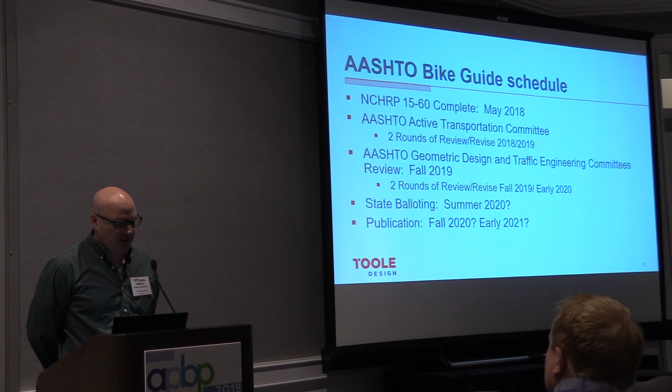So, big disclaimer, this is subject to change. I just mentioned we're in year 4 of this. And it's because there's a lot of players that need to say this is a good idea. So we finished the NCHRP part of this in May 2018. And we went through multiple rounds of revision. I believe we were 3 drafts to get to the final in May of 2018 by our NCHRP panel members.

And then we are now working with the Active Transportation Committee. We have gone through 2 rounds of comment response with them and changes. I'm waiting for last little comments from them to come in the next week or 2. And then we're going to make some final revisions. I've been told they're relatively minor. And then we kick it off to the real crew, the geometric design, which is really the highway designers, and the traffic engineers, which are really the state DOT traffic engineers.

And as you can imagine, their perspective tends to be at a different scale than what we're operating in. So they're going to get opportunities to review and comment, filtering their comments through the Active Transportation Committee. And then we need to address their comments. And they're going to be our harshest critics in this process. And we need to build their support because ultimately they are the voting members that decide whether this guide gets adopted.

And so I can't promise how long this will take. Our hope is that we can do this in an expeditious manner over the next 6 to 12 months, and then hopefully by next summer we can have a guide that's ready to go to AASHTO, the organization, which is really just a nonprofit like NACTO, where they will publish the guide and format it. So this is very tentative, and honestly these dates every time we present on this have been moving further out because there's just so many people involved in this.

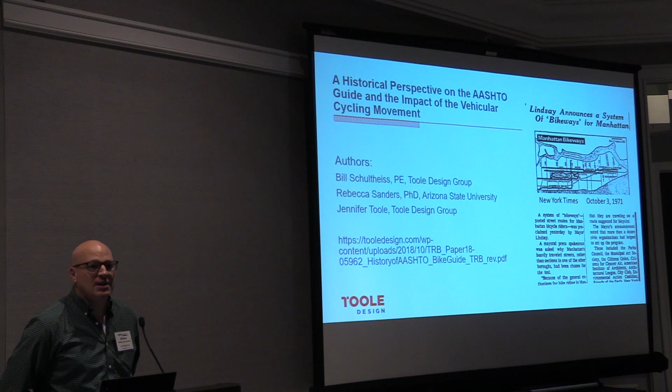And I was doing so much of that when we got into the update of the guide. I knew there were points of controversy because I got to work on the last guide in 2012, which we wrote in 2009. So you think back to 2008 and 2009 and the types of things we were doing in this country for cutting-edge bikeway design. Separated bike lanes were not on the agenda. We actually had a whole chapter on emerging treatments: protected bike lanes and bike boxes and 2-stage turn boxes and bike signals, and it was deleted because there was fear that we weren't ready and there wasn't enough built, and it was just too speculative on whether these were good ideas. And as you can imagine, since 2009, when that decision was made, we've built a lot of that stuff.

So looking back at the history, it's interesting: in the late 60s, early 70s, there was a big movement to address air quality. EPA was invented. There were bike protests. They're interesting to read about. The first Earth Day was an interesting one. People literally wore gas masks on their bikes because the air quality was so bad. There was a push to do a lot more improvements for bicycling, and some of them were interesting because they were pushes for making the street safer for cycling.

And I love this one, because if you're online or whatever, you kind of keep up with what other cities are doing. Well, the city of San Francisco has been trying to improve Market Street since 1972 for cyclists. They're still talking about it. They're still making changes, and there's a lot of controversy. What do you do to change it? But this has been an ongoing discussion now for 50 years, which is, I think, stunning. But they've never given up, and they're working on it.

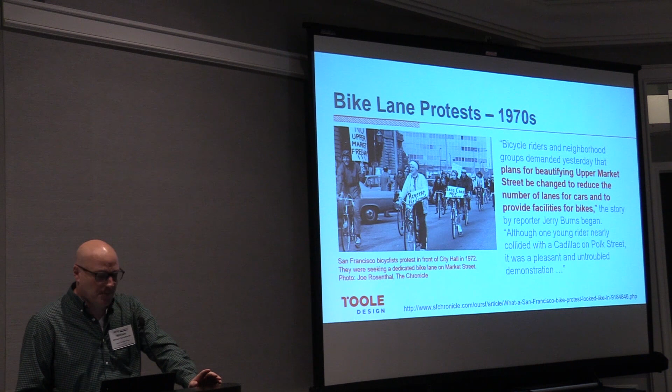In the early 70s, there was a bike boom. Carlton Reid wrote a book on it. It's fascinating, called Bike Boom. But if you look at old plans that were written in the early 70s, very ambitious. There were a lot of hopes and dreams in the cities around the U.S. that they'd become bicycle-friendly communities. And there was even some research funded by the federal government. USDOT funded the initial 70s research.

And a lot of the work was actually in Davis, California, because they were the first city in America to build bike lanes, and I was really impressed with the quality of the engineering minds in the early 70s on this. Really detailed thinking, really good analysis, and they found a lot of things that we know to be true. Bike lanes are generally safer, contraflow cycling is higher risk. Cyclists aren't really moving all that fast, and motorists, of course, will park in bike lanes if you give them a chance. So this is no mystery. We've known this for 50 years. But these things became controversial statements, interestingly enough, as I'll talk about.

So that quality research led to the first AASHTO Bike Guide in 1974. And as I talked to people around then, they didn't even know this existed. I talked to a gentleman who worked for Federal Highway in 1981. He didn't know about this guide, didn't remember it. And I found that interesting, and why did this guide disappear?

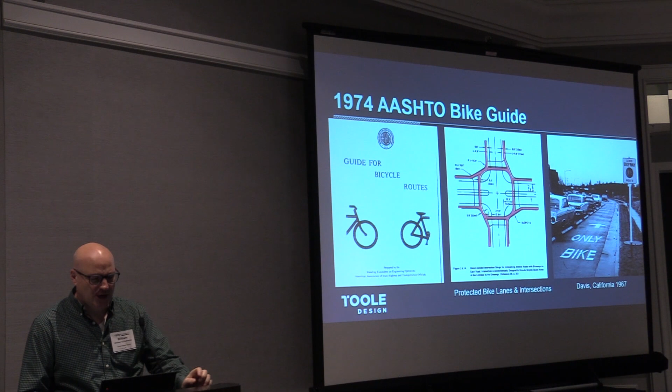But this guide had separated bike lanes in it, protected intersections, in large part because of the findings from the early California research. It recommended that bike lanes never be terminated at intersections. They continue all the way through. They should actually mark them through the intersections, like a bicycle crossing, a bike crosswalk. And they even do two-stage turn boxes. All three of those things became amazingly controversial in the 80s and 90s, even through the 2000s, and even to the present day, they're still not done in most communities.

So there were even warrants. Our profession loves warrants. Engineers love them: help me make decisions. And so they had very low volume thresholds for when a bike lane would be warranted. 2,000 vehicles a day was considered a busy street. Should have a bike lane. That's definitely every arterial roadway in America.

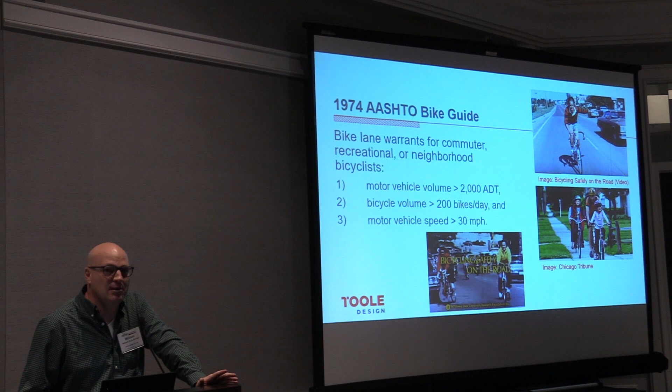There were some amazing instructional videos, and I'm going to show you a few pictures. You can find this on YouTube, and it is worth watching because you see actual video of the real conditions, the built environment. Bicycling Safely on the Road, from 1974, I believe. You can Google that on YouTube. So these pictures on the bottom are screenshots I stole from that video. And they're videotapes of Davis in the early 70s.

The initial AASHTO guide recommended that we think about bike trails and bike lanes as actually having lanes, like we do for cars. Like, what's one lane? One lane's at least 3.5 feet wide, desirably 4. Well, do I want a 4-lane facility? It should be progressively wider. And that concept of lanes is really important when you think about our shared use path system. And we know that there are challenges that result from not having lanes.

But the challenge in the 1970s is understanding the context of the 70s. We didn't have ADA. There were very few curb ramps. So when you start saying it's okay for bikes to ride on paths, and the path's a designated sidewalk, because cycling on sidewalks is largely illegal, then you had to put up bike route signs to make it legal to ride on the sidewalk, because that's where people felt safer. It started creating this idea of sidewalk routes and paths, and that bicyclists were losing their rights to the road. And can you imagine, again, screenshots from that video, how fun is it to ride on a sidewalk with no curb ramp?

You get to be a pretty good, skilled cyclist jumping curbs, but you don't want to be told you have to ride there. You don't want any perception that you have to ride there. Well, that caused controversy. There was an amazing conference I was able to dig up and actually get the proceedings from. And back then, no internet. You had to get the printed document where everything said had to be written down and put into the documents so people would know what was talked about.

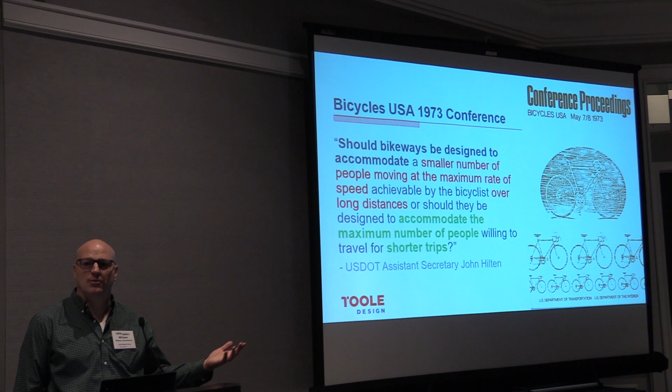But the thing that struck me as really prescient in 1973 was this fundamental question. What are we doing? What's the target design user? What's the target design trip? Are we trying to move a small amount of cyclists as fast as they can possibly go, which is really kind of the racing end of the spectrum? Are we trying to maximize the use of cycling for the reasonable short trips that people take, and try to create a system that is appealing to the most number of people?

This was a question that was being argued in the early 1970s as a fundamental question for the profession. And it was answered loudly that, in fact, we wouldn't try to create a system for the mass of people and what they wanted. We would create a system for a small number of people who were the real cyclists, who were already out there and who were comfortable, not afraid of traffic.

And you look at the advertisements from the 70s: if you're serious about cycling, your bike shouldn't be a toy. And there's this whole concept that cycling on the sidewalks or protected bike lanes means you're not a serious cyclist. That's really child's play. That real cyclists ride the road, real cyclists put on the lycra costume, and real cyclists get racing bikes sold by Raleigh. And actually, you look at what the bike manufacturers made back then, and it was mostly racing bikes. And so we created a whole culture around that.

And unfortunately, John Forester became powerful in this perspective because he really understood the levers of power, how things worked. So he joined the California Association of Bicycling Organizations, became its president, joined the League of American Wheelmen, got on the board, and then he got involved with influencing design guidance in the state of California.

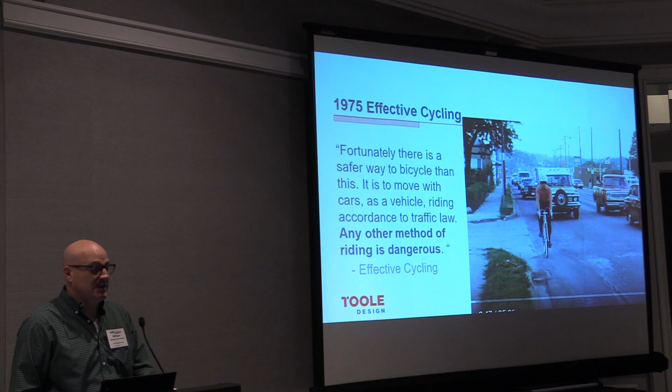So he invented his Effective Cycling program, and actually that video you watched is his. That video I encourage you to look up is 25 minutes of his philosophy of how this would be a better way to approach cycling, and that this was really the vision. We just need to overcome the human tendency of fear and anxiety, put those emotions aside, and just toughen up and get out in the street. The only thing stopping you from cycling was your own mind. We know today that's not true.

The problem we had in the 70s is, without widespread access to information, whoever wrote things down had power. He published books, went to conferences, he lobbied agencies. I've literally seen this book on the shelf of state DOT engineering libraries. It had an impact. And you can see it here. A serious cycling facility should be designed for 30 miles an hour. Well, that's a very small percent of the population that wants to go that fast and is willing to do it. And then if you're trying to do something less, you're not really trying to get that serious cyclist.

And this one just strikes me: that a facility designed only for childlike and incompetent cyclists is very insulting to people, encourages the toy bicycle attitude and discourages cycling for transportation. These are not made up quotes. This is really the mindset that pervaded this. And then you look at the contrast in this photo from the Netherlands and you think about, why did people listen to this man?

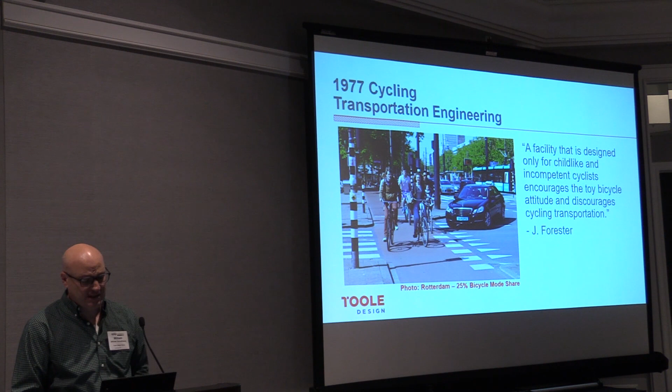Why was this not seen for the ridiculousness that it was? And the reality is, he was really smart again about levers of power. Bicycling Magazine was interesting to read in the 70s. It was always this give and take. If someone wrote an opinion piece, and John Forester was good at this, if someone wrote a research study, he demanded a rebuttal. There's so many research reports from the 70s where he was given permission to write a rebuttal to that research statement. That is unheard of, really, I think.

And his rebuttals were not based on science or evidence. They were based on his opinion. So he was given an enormously outsized ability to influence design guidance in this country. There's this gentleman, Bob Sommer, who was a really big advocate in Davis, a professor at Davis, actually. He said, hey, let's stop this war. We're all trying to create a system where people are willing and happy to promote cycling. You're trying to promote cycling. We're trying to promote cycling with separated infrastructure, bike lanes. Why are we fighting with each other?

He said, why don't we join up and we'll create networks. We'll advocate for networks of bike lanes and paths for people that don't want to be in traffic. And we'll also advocate for you to maintain your right to the road. So we don't create mandatory use laws. We'll oppose them. Let's join up together. And it was flatly rejected as a slippery slope, that if we give in an inch, we're going to lose it all. And so he took with his colleagues, and this guy was important, John Finley Scott, because he became the head of CABO after John stepped down.

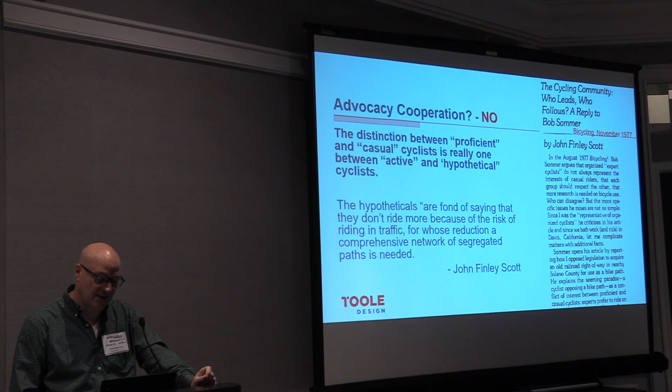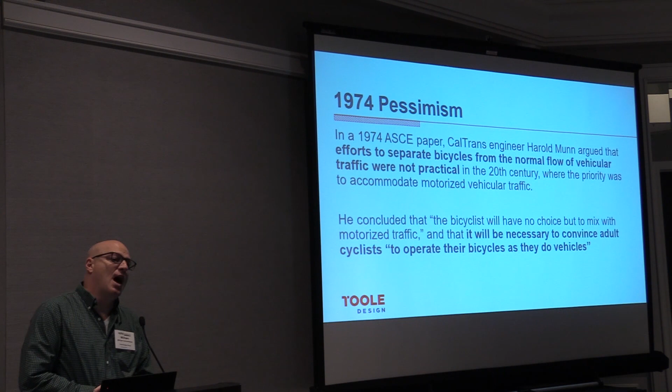And I think what's challenging is that in the 1970s, white male-dominated advocacy in this space didn't care. It was about their perspective. I'm comfortable with it. I don't care about your perspective. And I'm going to drive this. And it's unfortunate because this 74 ASCE paper was really tragic. Harold Munn was working for Caltrans, helping write design guidance. And he said basically, culturally it was going to be impossible to create a system where we had biking as normal in the United States.

That ship had sailed. We're a car culture. We're always going to be a car culture. And people just need to get used to riding the road. And why do I say these things matter, this advocacy?

The first bike guide ever written is the 1978 Caltrans Bike Guide. Look at two sources in it. These are sourced in the bibliography. Harold Munn's pessimistic article saying, this is never going to happen, get used to riding the road, and John Forester's nonsense that was not based on science, but was called a design guide, were sourced in the first 1978 Caltrans Bike Guide as valid sources to make decisions about design guidance.

And what that led to was, again, a strong push of advocacy that all the things that we now know are important for safety were removed from the next version of the guide. In 1981, protected bike lanes were removed, protected intersections were removed, two-stage turn boxes were removed. It was actually stated as a better practice to terminate bike lanes before intersections. You shouldn't mark bike lanes through intersections because bicyclists didn't have the lane positioning. They were removed not based on science, but based on advocacy, strenuous advocacy.

And I talked to Mr. Lemieux, and he was the guy that worked for Federal Highway, who was one of the prime authors of the '81 guide, and who did not remember the 1978 guide, didn't know about it. And he said John Forester provided over half the comments in the '81 guide. And I've talked about how long we've been working on this update to the current guide. He dominated the space back then.

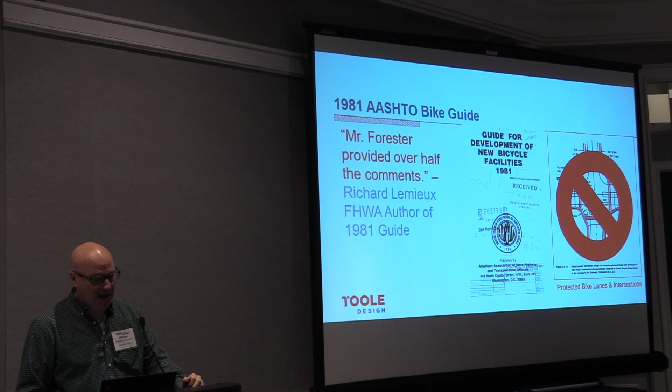And so it's interesting that in the next '81 AASHTO Bike Guide, this is a quote from the introduction: Really, the only way we're going to improve cycling and motorists is through behavior, enforcement, and education campaigns. That's the way we're going to make a safer outcome. And we know that education and enforcement are not enough, that they really have a very minimal impact on changing built environment outcomes. And then it led into changes of federal policy, really de-emphasizing it, kind of stopped funding it, stopped funding research.

And then the idea was, well, the wide outside lane became the thing. This was the magic treatment that was going to make it great for everybody. And it's still in state DOT design standards to this present day. The state of Texas wrestles with this. And they have a design directive that every road they build has to have a 16-foot wide outside lane to accommodate cyclists. And it doesn't matter if that road is 55 miles an hour or 25 miles an hour. That is the default standard for cyclists.

And it led to this problem culturally, the 1% problem, I call it. I go to any public meeting and the average person says, why are we doing this for such a small minority of the population? And when they say that, they're talking about cyclists, racing groups, typically, the Spandex Road Warrior. Why are we making these changes for them, for this small niche group? And so what I like to say is that we need to understand this history because it created a culture that we're living with the ramifications of to the present day that affect not only the design profession, but the public's perception of what cycling is, because we built out this environment.

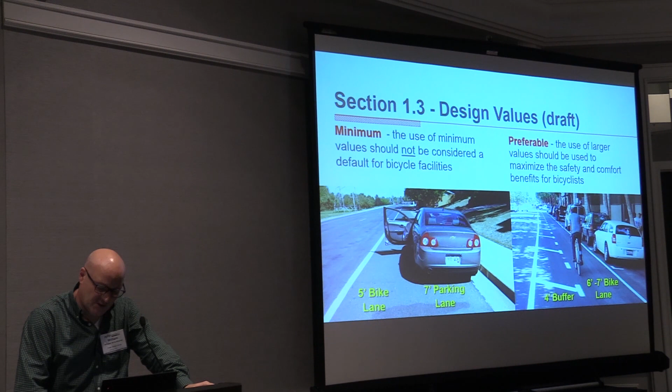The biggest thing that we've wrestled with as a profession is we design to the minimums. The presumption has been that if you do the minimum, it's safe. What does safe mean? We've been challenging that notion of what safe means in this guide head on. When it comes to safety of a vulnerable user who's not in a metal box, that safety has to include comfort in your perception of whether you're safe, if it's going to be real. And so we're being very explicit in saying use of minimum values should not be considered a default, because this frankly has been an industry problem. We're saying that you really want to focus on the preferable end of the spectrum. You need to justify why you're not doing that, if you're going to deviate from it.

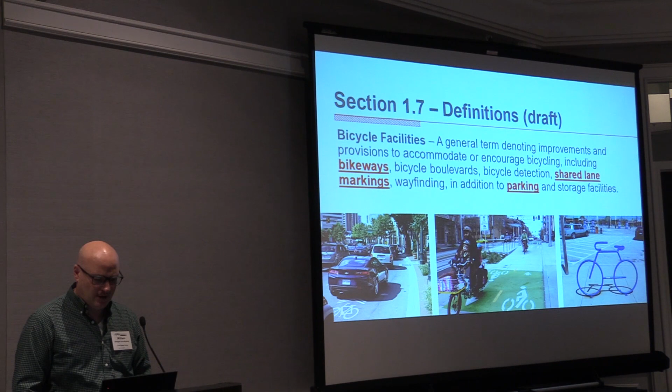We've had a problem in prior editions of the guide, and actually in the MUTCD, with how we talk about this. What do these things mean? We've had a meaningless term, bicycle facilities, that's been tossed out there for a long time. When you look at the definition, it includes everything from bike lanes to parking garages. Well, that's true, they're all facilities. But it's really too broad of a term, and it creates confusion. So we've created a new term, bikeway, which has been used, I think, informally. We tried to define it. We're open to suggestions for improvement.

What we wanted to really emphasize is that a bikeway is not a shared road. A bikeway physically separates you from traffic, or it's an intentional design to force traffic calming, which is what a bicycle boulevard does. It really prioritizes your movement. So you're either creating designated space with a separate lane, or you're traffic calming a local street that's really saying it's bike priority. That's the intent here, because people are calling shared roads bikeways, and it's a different ballgame, and we're trying to make that distinction.

And separated bike lane is the other one. This is an emotional one. A lot of the industry likes to call them protected bike lanes, and I'll tell you straight up, it's never going to happen in an AASHTO document because the word protected is scary.

And so, going more with the obvious, separated, I think it's perceived to be a non-biased term about what it is; it just describes what it is. But it needs to be physically separated by vertical elements, and what's interesting is if you use a horizontal buffer, and we've added that in the recent iterations of this, because ideally a separated bike lane has a buffer.

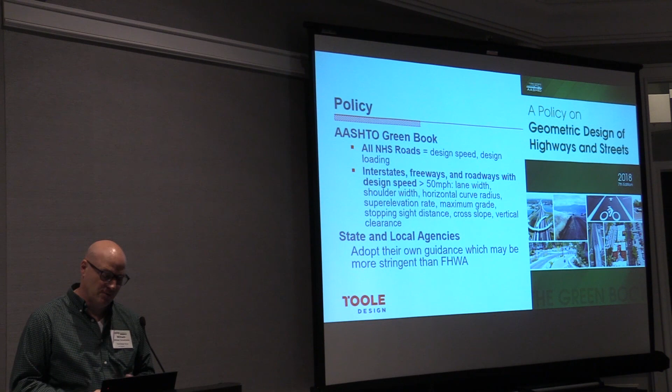Should we have 2 Green Books, one for cities and one for highways? Or should we do away with the bike guide and have one master street design book and combine it all so we can understand the trade-off choices we're making? So that conversation's happening within AASHTO, and I think that's wonderful. They've always supported flexibility. We continue to do that.

But like I mentioned, the most powerful aspect of the new Green Book is context sensitiveness. And when we're in the urban environments we're talking about, that's crucial. In the history of safety research, a lot of it wasn't based on an urban context, really rural, suburban, highway context. And that research was misapplied in urban areas, with devastating consequences for safety, ironically, in urban communities. This book was really important for showing ways in which we're misinterpreting existing design guidance. So this, again, was a primary source for our guide, as is the MUTCD.

Now, the challenge with the MUTCD is, like AASHTO, it's on a slower update timeline. We were in a situation where the MUTCD that was published in 2009 was last written really in like 2007. And so now we're dealing with an amazingly outdated document when it comes to bicycling. So we made a deliberate choice in the AASHTO guide to work with the MUTCD, but we have to move on. We can't wait for you.

And so we've included a whole bunch of treatments that are not in the current MUTCD, but are likely to be in the next edition, because they've all been approved by the National Committee, and I think are likely to end up in the new MUTCD.

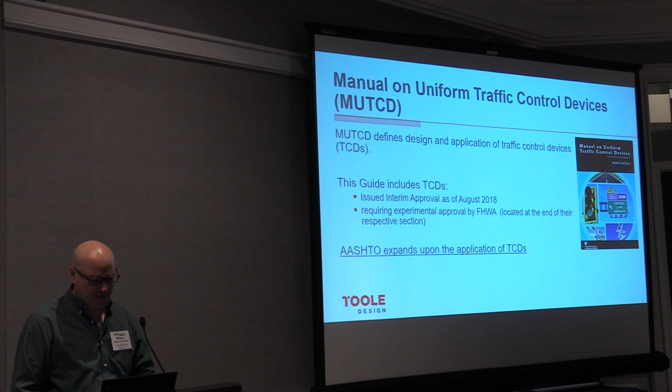Yeah, and the thing about the guide to keep in mind is it's a guide, it's not a standard. I feel like engineers get really hung up on that term, and the way I think of it is a standard is something that a structural engineer needs to use. If you don't design to the standard, the building falls down. Guidelines are just a guide, and that means that there's that inherent flexibility built into it, and we should really be leveraging that on all of our projects, applying the engineering judgment and the planning judgment that we're allowed to use to get the best benefit for each individual situation. And everything that we're doing really needs to be context sensitive.

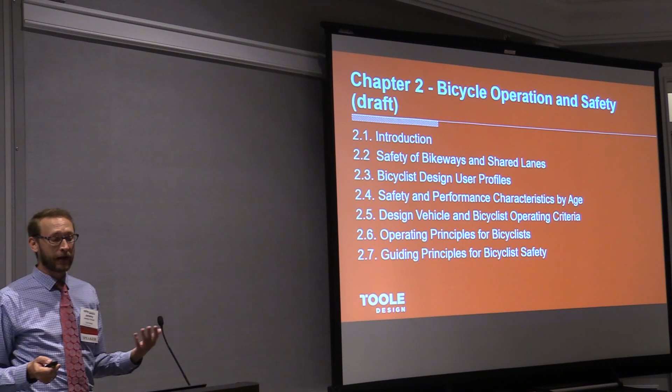Chapter 2 deals a lot with operations and safety and really the basics of these concepts. And as Bill mentioned, it is very dense in terms of research and studies that have been prepared. So if you follow the guidance that's in this guide and the homework that Jennifer Dill gave us this morning, we will already tell you what sources you can turn to to dive a little bit deeper into this content. Everything we've done here has been very heavily influenced by the research that has already been prepared. And a lot of this goes way back.

So as Bill mentioned, studies all the way back to the 70s really hit on these ideas that riding against traffic is more dangerous, that you have lower crash rates when you actually provide facilities. But we also still have all the anecdotal evidence that when you're riding on a shared use path, things like a bollard in the middle of the path, while maybe a good intention to keep vehicles out, present safety challenges. When you have insufficient width, and we've all experienced this on our most congested shared use paths on the weekend, it's a nice day, everybody wants to be out on it, but we designed it to the minimum of 10 feet, that's not going to be comfortable or safe for anybody. And really leveraging those experiences and that research to provide the types of facilities that we want.

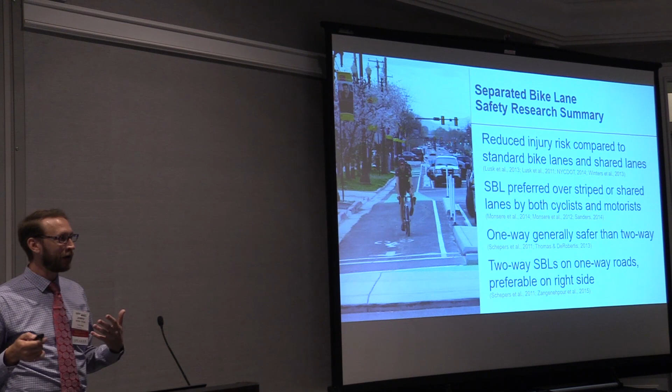And this is just another spattering of some of the other research. The one I want to focus on here is this idea of the standard bike lane versus the shared bike lane. While I follow the APBP community, I'm also an ITE member, and you get this on their online community a lot, where people say, well, a bike lane in the door zone is unsafe, so we shouldn't do it. Well, that's just garbage. The research shows us that when you provide a bike lane, it's going to be more safe than the shared lane environment. And we can point to multiple studies, but also multiple locations around the country where this has been the case.

So one example is 15th Street in Washington, D.C. It used to be a shared lane environment, and you had maybe 30 bikes a day that would ride on it. And yet they had 20 crashes per million cyclists in that scenario. Then they did a one-way separated bike lane, but then you couldn't get home because it was a one-directional facility and nothing to link you back up. You saw a little bit of increase in ridership. The safety also improved.

And then when they provided a two-way facility, which we know two-way facilities have inherent problems with operations at intersections, there are some safety challenges to it. But what we saw is that the crashes per capita went down, 7 crashes per million cyclists in that location. And you're also seeing that the ridership is going up.

And then we have other research that points to the idea of when you have a connected network and you have higher ridership, that in and of itself creates safety in numbers principle. So everything in this guide just turns back to the research to be able to point the people that are trying to implement this to the more information that they may need to justify their design.

And even with these numbers, you still have headlines like this, that the 15th Street bike lane is the most dangerous bike lane in DC, which is just not factual. It's not looking at all the statistics of that location. So we have high ridership, so we might have more crashes than what used to be there before. You only had 30 bicyclists there before. Now you have hundreds a day that are riding on it.

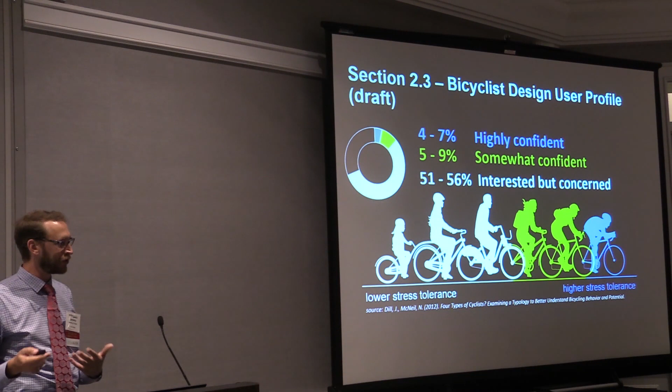But we also have to recognize that a lot of these interested but concerned bicyclists have very different performance characteristics. They typically are biking a little bit slower than our strong, fearless cyclists. And they might also have different characteristics in terms of the bikes that they're riding. You start to see lots more cargo bikes, bikes with trailers, pulling your kid, trying to get to daycare, you want to be able to go to the grocery store after work. And so the bikes themselves are also changing. And that's all baked into this guide as well.

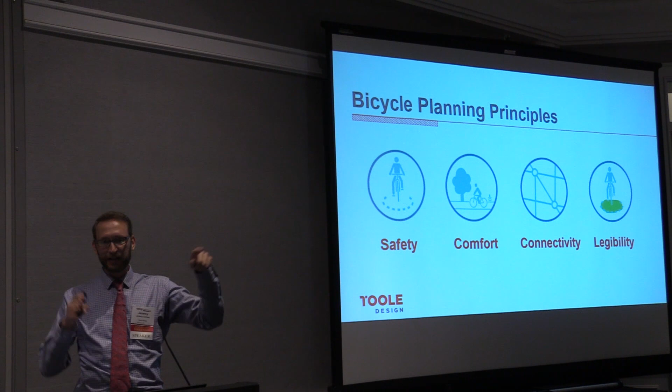For chapter 3, this gets into planning. So all the baseline efforts that we need to build out our bicycle networks. And it focuses on these 4 key principles: safety, comfort, connectivity, and this concept of legibility. That it should be intuitive to somebody trying to use the network how to navigate through it. They shouldn't have to look at a sign over here and then look at that signal over there. It should just be intuitive.

And also recognizing that we need to do a better job in community planning to create links where they don't exist. This idea that with cul-de-sacs, we've sort of broken up our street network and forced bicyclists that might live here to go all the way out to the street, even though they're just trying to get to the school. And this is something that in the transportation side, we don't always have control of. That's why we need to involve politicians, involve the decision makers that approve the planning effort of communities to be focusing on these issues.

We can include this as part of our bicycle master plans and find these opportunities to retrofit existing neighborhoods. But as new neighborhoods are built, these need to be fundamental ideas baked into the design of those communities. And that's very true in a suburban context, where oftentimes these are developed, built, and then we think about the transportation network after the fact. This needs to be part of that upfront planning.

This idea of legibility and connectivity, that when you have one bike lane, and I see this all the time, you build a bike lane, nobody uses it because it doesn't connect to anything, and then you hear from the public, well, nobody uses that, why are we doing more?

And it's because it doesn't get you anywhere. We need to have a network that actually gets people from their homes to the destinations that they're trying to get to. And that's not just getting them to work, it's creating links to the store, to the doctor, those short trips that are all around your house. And it's really easy to focus on this idea of, well, the commute mode share, that's what we need to focus on. No, it's all those little things around your house that you should be able to link to.

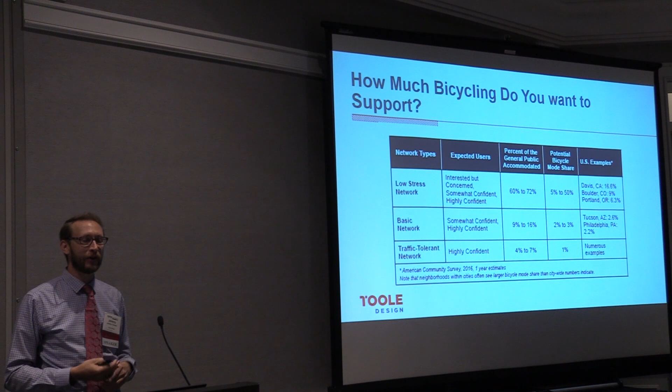And as we look at examples around the country, the places that have sort of focused on the basic network and high-stress tolerant networks really don't have a high bicycle mode share because it fundamentally doesn't accommodate those people. Interweaving these types of networks together is really going to get us a network that's going to work for the most amount of people, and that's that 72%. It's really accommodating everybody that chooses to bike.

So recognizing this as you're doing the effort of planning out your network, establishing what is going to be that low-stress network, and then overlaying that with the other types of networks, and making sure that people can get from A to B in a way that's going to accommodate their abilities.

And I sort of mentioned this before, this idea that we focus so much on the commute, but the number of trips that are commutes is really only around 30% of the trips that we take every day. All the other things are shopping, going to the grocery store, going to the movies, or whatever else we're doing. It's a much larger percent of the types of trips that people are taking. And we need to focus on that to create links between somebody's house and the trailhead.

I ask people, what type of cyclist are you? And I'll often hear, I ride on the weekends, I ride with my family on the trail. And when you ask those people, how do they get there? Well, I load my bike onto the car and we drive to the trailhead, and then we bike on the trail and it's nice, and then we load it back on and we drive home.

We need to be making those connections between people's houses and the trail, and also recognizing that the trails themselves will serve an important purpose for some slightly longer trips. Again, this idea of overlaying these different types of networks and understanding what their use is to get the biggest bang for our buck.

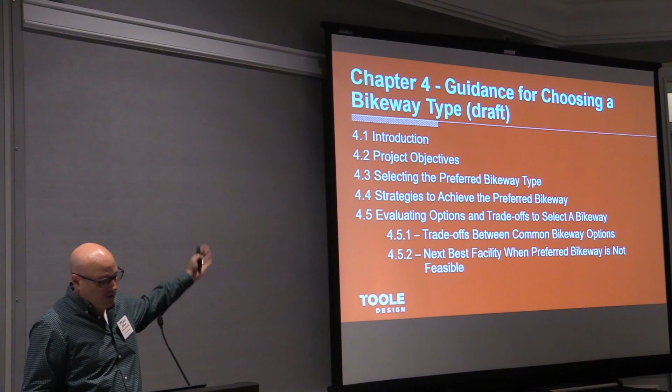And so we're trying to be more direct and say that if you really want to improve cycling safety and actually increase use, there's a land use component to this. But you as the transportation agency have to make some different design choices, and we're going to tell you how to do that. So we've got a chapter on bikeway selection, which largely follows the new Federal Highway resource, the Bikeway Selection Guide.

And it starts with the concept of design controls, but again, who's a design user? Some agencies are going to say, we don't care about the interested but concerned design user. They're not our target audience. We're going to focus on the cycling club racer, and that's totally fine if that's what that community wants. But I think a lot of other communities are going to have different goals.

What kind of bike, what kind of vehicle, a design vehicle? Engineers are so focused on design vehicles. Is it a truck or a WB-50 or whatever? But increasingly, with electrification of bicycles coming, we're seeing quite a diversity of vehicles, and we're still wrestling with it, and I think we're going to keep wrestling with it until it's printed.

What do we call new mobility? Should this be called a bike guide anymore, or is it something else? Because now we've got scooters and other electric mobility devices, and they're going to be using this. And we need to be a little more inclusive in who our design user is. So we're writing the guide to reflect that these things are coming, but it's going to keep being called a bikeway guide for now. But as a profession, we have to wrestle with this question a little bit.

So focusing on context, taking advantage of the fact the new Green Book is defining these contexts very specifically, and that the goal of the AASHTO guide is to accommodate the vast majority of the population. Really, the target design user assumption should be the interested but concerned. And we're basing that analysis on the level of traffic stress, which Peter Furth helped develop at Northeastern.

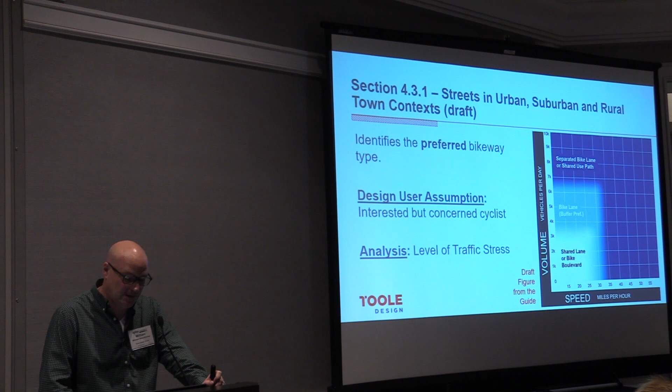So we're making the jump from shared lane to bike lane at about 2,000 to 3,000 cars a day. And bike boulevard design guidance tends to recommend less than 2,000 vehicles a day. Portland is maybe a leader in bike boulevard design guidance. I know you've been talking about even lower thresholds on some of your streets. But again, we're starting to have research that is backing up these decisions.

We also have a huge system of rural roads, and the reality is we'll be lucky to have shoulders on them. We have a lot of rural roads where there's not even a shoulder. And the design assumption here is maybe a more confident cyclist. We can use the bicycle level of service tool to decide on an appropriate shoulder width, because that tool was developed primarily to evaluate striped bike lanes and shoulders. So we're giving some guidance, and it tends to match up quite well with AASHTO Green Book design guidance for shoulders for motorist safety.

So there's not a lot of tension there. But another aspect of rural roads which is interesting is that we have places in rural communities where you want to go above and beyond the shoulder. National parks, this is a national park. You know, let's build some really high quality shared use paths. So maybe it's a cross-country bike road.

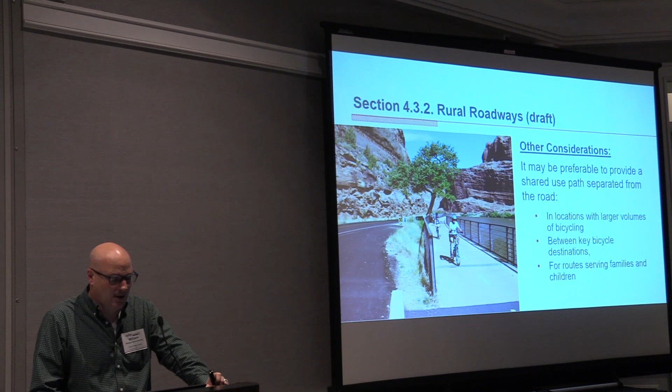You know, we've got some ambitious efforts underway to have cross-continental bike trails that go from East Coast to West Coast, north to south, and the idea is that you're not on a roadway. So let's have a national network of trails. They're going to go through rural areas, so we talk about that in the guide.

We also talk about how the charts are a starting point, but there can often be some outlier conditions that people don't think about. And I actually experienced this in my own neighborhood. There's a street that is wonderful for cycling in a shared lane, 22 hours a day. But in the morning, there's 3 schools on this street. It doesn't go anywhere. It dead ends at Union Station. And it's gridlocked. It has more traffic than an arterial street. And it's totally stressful. You can't bike on it.

And so we actually have written into here a lot of other things that you've got to think about, the nuance of the conditions of your street, and that you may make a decision not just on simplistic charts of average annual daily traffic in 24 hours, but you have something weird going on. We have a real unique peaking thing happening for a certain part of the day, and that may cause you to want to say, you know what, this should actually be upgraded. This is the kind of situation where, yeah, I get for 22 hours a day it's fine, but we'd actually want to have a protected bike lane here or a path. Again, that's a choice.

Another big one is streetcar. I live in a city that's doing a lot of streetcar. Seattle's doing it, Portland's got them, but they're killing cyclists. You know, the existing NEPA process doesn't make any accounting, when you do a safety analysis, of the future safety impacts of streetcar. And there'll be a little paragraph you'll see in these 800-page documents. Have you considered bike and ped safety? And they all say the same thing. It's a cut and paste. We've thought about it, we're fine, we've accommodated, but it's really super vague.

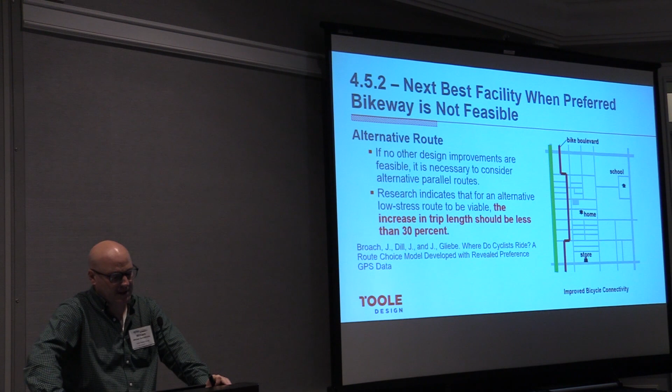I think a challenge we have is tying this together, like, well, what is the trip? How do I make that decision? That's a planning level decision. So I think that really comes back to a planning process where you're thinking about the density of your network. At a practical level in a corridor, I think this is a helpful tool to allow us to push back sometimes on "just go use that other street," which is really what happens a lot right now, especially on some of the DOT roads: just go use that local street. And so what we talk about in this guide is, okay, that's fine, but just go use that other street.

Well, what's happening over here? Is there a signal? If I'm crossing a 7-lane road and I'm on the local street and there's no signal there, is that really an alternative? And we talk about that head on and say that if that whole thing is not a viable alternative, including the ability to safely cross the arterial roads, it's not an alternative.

And then really, if you're going to say a parallel route is the option here, we can't help you on the street, well, what is your responsibility to help us achieve this? As the state agency who owns the green street, but not the purple one. But you're making your street unsafe. Should you help the local community make the purple street safe? And then when we're at your arterial crossing up here, should you put a signal in to help us cross the road so we can actually use this alternative route?

And so we talk about the challenge of the warrant system in here and say we need to be doing future volumes. And it's okay, and you got to think about the context of your project to make these decisions. Just to your point there, would it be trip duration then? So if that signal or that lack of a signal there increases that crossing, it increases the duration. Yeah, I'd like to see the trip length consider time as well, because I think that gets into a case where some of these can create a lot of extra time, which becomes a deterrent.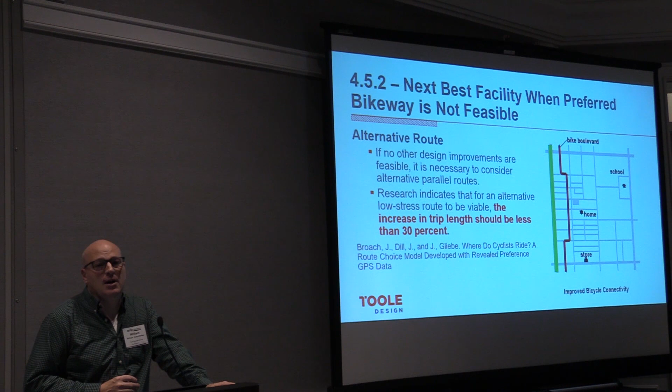So we talk about that in the guide as well, that you have to be thoughtful of this, the whole package, making this trade-off. And does it address temporary conditions too? Because I know I'm willing to go further out of my way for a temporary condition. Yeah, we talk about work zones, we need to accommodate, it's in a more general nature, unfortunately, but it's an important aspect of this. Yeah, this idea is also tied very closely to the legibility and connectivity of the network, and that it shouldn't be overly circuitous either.

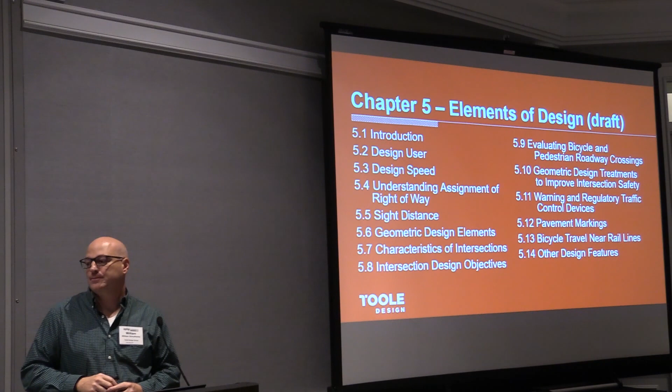And then in the signals chapter is where we talk about the crossings of the intersection, that essentially, just as a pedestrian doesn't like to wait more than 30 seconds to cross the street, the research shows that the bicyclists are in the same boat. And so being very deliberate with that signal timing to create more frequent opportunities for people to cross, because if you don't, then they tend to make more risky behavior, which then leads to safety challenges. So with safety in mind as the high priority here, that really drives a lot of these decisions.

Bill likes me to cover chapter 5 because it's a new chapter and is the bulk of the good content in the guide. Yeah, I was curious about the language around parking lanes. When you say designing in a constrained environment, that might be superficially constrained if there's a parking lane, we're saying that can't be moved. What sort of language addresses that? It is not deliberate in saying how to make those choices. It helps you to weigh some of those options, but as a guide that has to be adopted by all states, we can't really be prescriptive about making those choices.

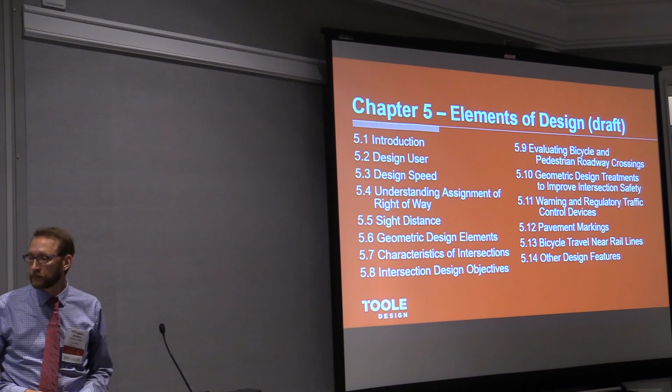But I'll add, we do discuss parking, so we have a whole section in there that discusses how do I get space. It's framed that way, because a lot of what we're doing is retrofitting. And there's only a few ways to get space. Take out a lane of traffic, narrow a lane of traffic, or get rid of parking. Those are really the three, or reconstruction, widen the road, which is rare. And so we do talk about it head on as a strategy. And I'll get into it in a bit, the idea of what does constrained mean, and I'll say it when we get to that point.

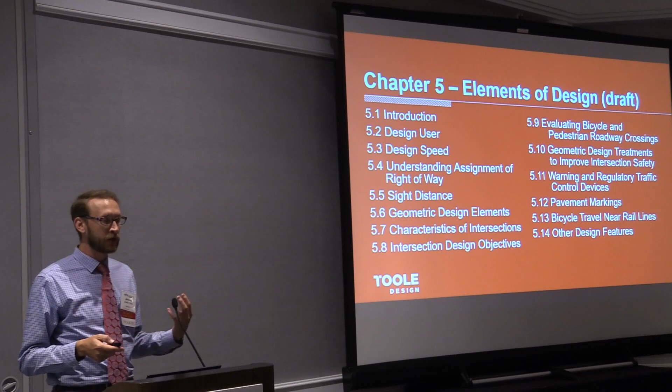So, will you be focusing more on shared use paths, regional trails, including in urbanized areas? Yeah, that'll be in another couple dozen slides here. So chapter 5 is where we have embedded a lot of the content that used to be scattered throughout the old guide. There used to be fundamental calculations in the shared use path chapter that are really applicable to a lot of other bikeway types. And so chapter 5 is the go-to place for all the baseline information that you need to do the design. Specifically the design user, sight distance, and then a lot of content about intersection design and the fundamental core principles that need to be upfront with all bikeway intersection types so that it will address issues of safety and comfort.

So it talks a lot about the design user, that essentially the adult bicyclist is our design user as the largest and fastest bicyclist, but there are exceptions to this rule, that when we're looking at height for sight distance considerations, we need to really be looking at recumbent and child cyclists. If you just think of a yardstick, that's sort of what you need to be looking at, not a 6-foot eye height of an adult bicyclist on a conventional bike.

We need to be using different speeds for the crossing speed of a bicyclist, and that essentially in a lot of cases that will actually be the pedestrian speed that will be the controlling speed. And then recognizing that when accommodating different types of bicycles, we need to be thinking about longer lengths. So that's the bicycle that's pulling a trailer, tandems, other types of bikes that are longer than a conventional bike.

So a lot of this content is the same as the last version of the guide, just baseline dimensions. But we also start to address other types of bikes that we see creeping up, whether that's the UPS delivery vehicles, e-scooters, and other vehicles that have different configurations than the conventional bikeway types.

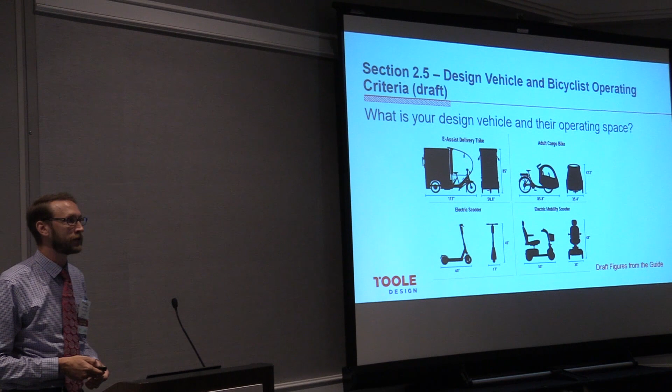The other thing that we've sort of addressed in this guide that I hope that we've done a much better job on is this idea of separating the different spaces and what their intent is. Recognizing that the bicyclist only ever takes up the physical space that they occupy, and then this idea of operating space is what they need for the natural side-to-side motion that they feel comfortable. And this is particularly true of slower, less confident cyclists.

The fast bicyclist that's going 25 miles an hour, they're sitting on rollers all day and they can just go in a perfectly straight line. Whereas somebody that's biking at 11 miles an hour is probably going to be a little bit more wobbly, and that needs to be baked into the design decisions about the widths that we're providing, regardless of what that bikeway type is.

And then in addition to those spaces, we need to accommodate the shy space from the things around us, whether that's a curb, a tree, a signpost, etc. And so the guide identifies specific shy distances for each of those different types. So again, recognizing that you only ever occupy the space that you occupy, but you need that operating space to accommodate that natural side-to-side motion.

And so we're also talking a lot about social cycling, this idea that when you're riding in a car, you want to talk to your passenger. The same thing holds true for people on bikes. You see this a lot on shared use paths, that they're built too narrow, and so you're trying to have a conversation yelling over your shoulder. That's not really social cycling.

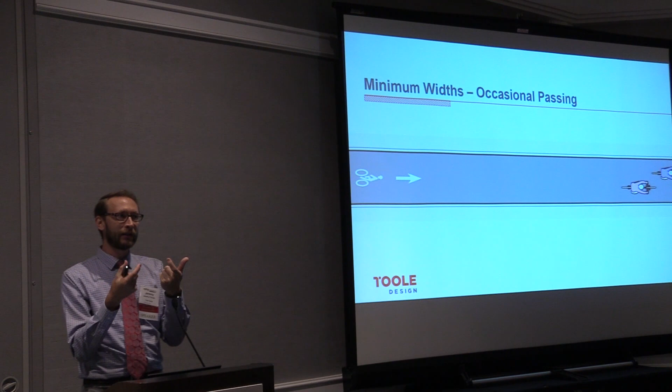But recognizing that when we're providing narrower spaces, all we're going to accommodate is occasional passing. It's not going to be comfortable for people to ride side by side, but it's easy for them to pass somebody in the instant that they need to. And to illustrate this, we have a slick little graphic. Remember, it's just the instant that the bicyclist is next to the other bicyclist that we have to accommodate the physical space of both of those users and shy space between them.

So we don't have enough width for the operating width and shy space, but we don't need it because it's just ding, ding, ding, I'm passing on your left. You have that instant that you're passing them, and then you proceed on your way. So that's really what these widths are going to accommodate, whereas social cycling, the widths are going to allow for the natural side-to-side motion and the shy spaces that we need between those users. So that's what you need to recognize when we're talking about the widths of these facilities.

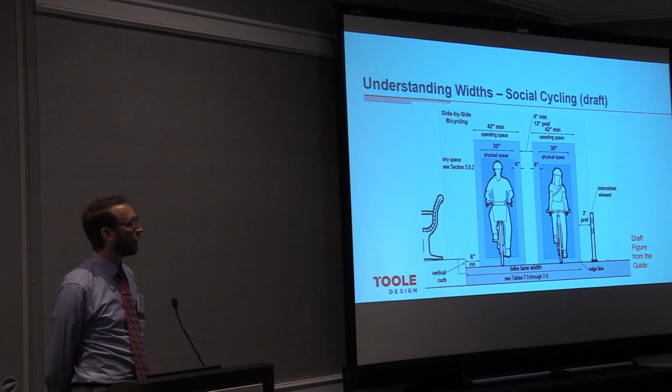Planters, I'm trying to remember, I think they're 1 foot minimum, and this has to do with whether they're, like, a planter is going to be more of a fixed object as well, so similar to a wall or a fence, a long linear object, that's something that you're not going to feel comfortable riding very close to with your handlebar basically touching the wall.

Do you have any variations of the width for two-way traffic? Yeah, so there's different widths for one-way versus two-way facilities. We'll dive more into that in the separated bike lane chapter.

So in terms of design speed, there's more of a range to be thinking about now. Generally we're talking about designing separated bike lanes and shared use paths for a 15-mile-an-hour design speed, not 30 miles an hour. Recognizing that 18 to 30 might be appropriate for a shared use path, depending on the context of what that path is, and also recognizing that your context may change along the length of a path.

So for example, if you have a shared use path going through a more dense area with lots of trailheads, probably more pedestrian traffic, you probably don't want to design that as a 30-mile-an-hour recreational cycle path. But if you're dealing with a longer, more rural or suburban path with few trailheads, it might be okay to accommodate those high speeds, and that might change along the length of that trail. Again, context really matters when we're talking about design.

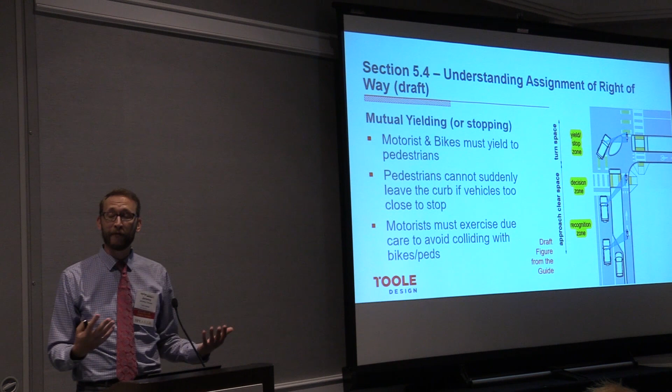and comfortable manner. And so the key thing is to make sure that you have enough space for each user to see each other, make a decision about what they're supposed to do, and then actually engage in that decision, stopping or yielding, for that design decision.

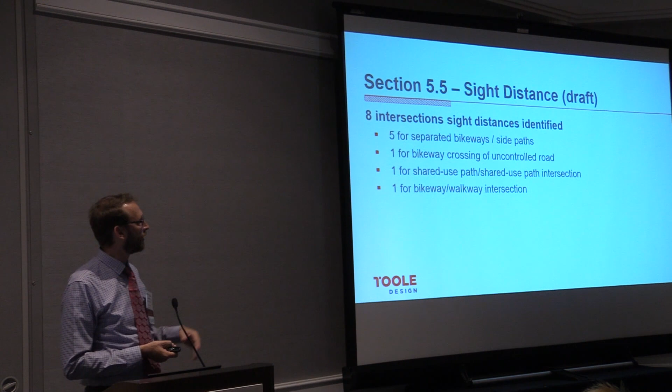We also talked about stopping sight distance in the guide, lots of different sight distances. So it's 8 now instead of, I think there were 5 in the last version of the guide. 5 of these are for separated bike lanes because this is just new information that wasn't in the last version of the guide. And then we've also tried to be deliberate about giving you better charts and things so that you don't always have to run the calculations. There's more lookup tables to simplify this. We found that when we give you just an equation, we often don't do the whole calculation and you simplify it. Whereas if we give you a lookup table, it's easier to actually implement it.

So the first one I'll talk about is for separated bike lanes, bike case A as we call it. This is for separated bike lanes at an intersection, and this idea that it's going to depend on who gets to that intersection first. Is the motorist going to get there first, or is the bicyclist going to get there first? And all of this is really contingent on what is the intersection design speed for the motorist. So it doesn't really matter whether this road is a 35-mile-an-hour road or a 25-mile-an-hour road. What really matters is what is the effective turning radius at this intersection, and how fast or slowly must a driver go around that corner to navigate it safely. That's all going to determine how much sight distance we need.

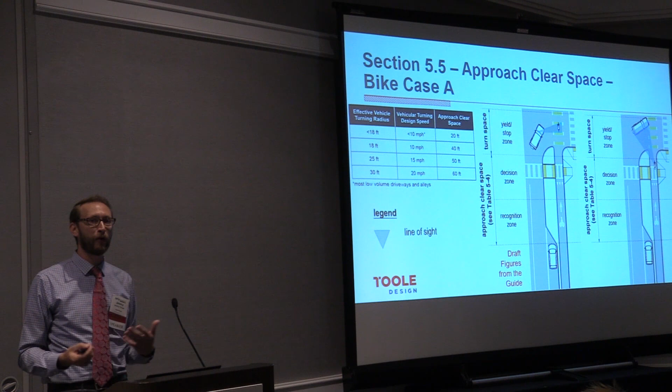Rather than giving you long, complex formulas for that, again, we've given you a lookup table. So based on the effective turning radius, we have an identified vehicular turning speed, and then how much space you need on the approach for those users to see each other. So when you can slow the vehicle down, you need less space. When you're allowing that vehicle to turn quickly around the corner, you're going to need a lot more space for those users to see and react to each other.

Same thing holds true for the left turn across a two-way separated bike lane. This motorist is going to be able to see the bicyclist coming in the opposite direction as long as you've already provided the approach clear space up here. But you have this unique challenge of the motorist being able to see the bicyclist that's traveling in the same direction as them, and that you similarly need the same amount of approach clear space for that situation. This is really only applicable for two-way separated bike lanes.

Question? How did you come up with the vehicle turning speeds for those radii? They seem pretty fast. So the turn speeds came from a couple different sources of research, but it was based on observed speeds of motorists through things like right turn slip lanes and other locations like that. And rather than using the average, we veered more towards what is the highest vehicle speed that we're generally seeing around those corners, because we want to make sure that that is accommodated so that the bicyclist and the motorist have enough time to react to those locations. These numbers do differ from what is in the AASHTO Green Book, which focused on the comfort of a motorist going around the corner. And they differ not just a little bit, but like threefold. Right.

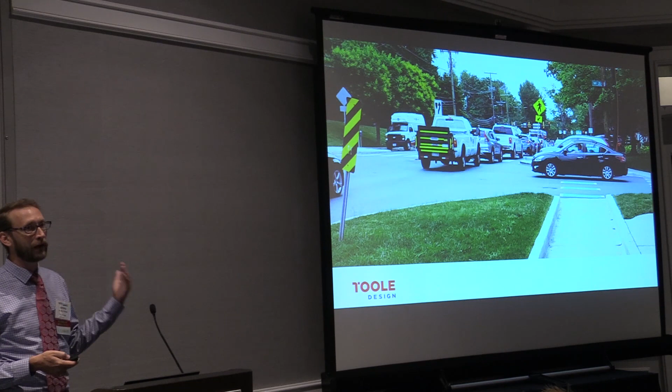So the guide gives you two scenarios for that type of interaction. One is where the motorist first looks for crossing pedestrians, then they move forward to a point where they can see a bicyclist in the separated bike lane. That's what the vehicle code tells them they have to do.

Actually, I remember taking my driver's test, and the person that was administering it saying that I did the right thing because I stopped before the crosswalk and then encroached in it to the point where I could see the oncoming motorist. It's what drivers naturally do. So they can first look for the bikes, and then they may proceed into the bike lane to get a line of sight for a motorist.

So when you have on-street parking, that's often going to be the case, that they're going to need to advance forward to see past those cars and may or may not block the bike lane. This will also be contingent on how much buffer space you provide between the separated bike lane and the edge of the travel lane, right?

The other scenario is if you're trying to accommodate all of that from one location. So in this instance, the motorist is trying to assess line of sight to the bicyclist as well as to the motorist from the same point. And what this is often going to mean in an urban environment is that you would end up stripping out all this parking to accommodate that.

And I've gotten into discussions with folks in Philadelphia about this, that if you look at all your intersections today, you're not accommodating this. So the notion that because we're doing a separated bike lane, you have to give 350 feet of sight distance from this far back really just doesn't match up with what we're already doing today. But recognizing that this might be an appropriate treatment in some locations.

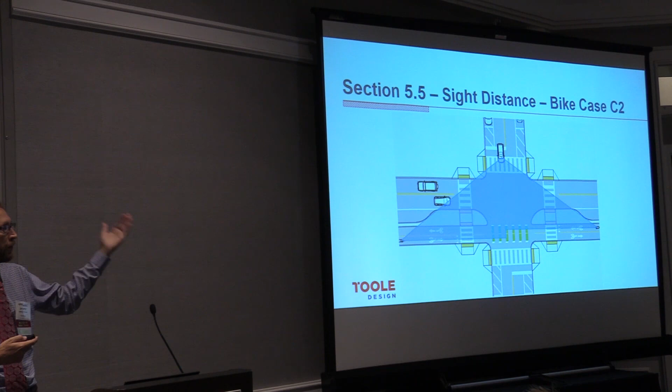Again, context really matters. And then also recognizing that we have to look at cross traffic for the motorist that is crossing that same street but from the far side, and making sure that they can see oncoming bicyclists. When we talk about intersection configuration, there are a couple core principles that are really baked throughout all of this design guidance.

Primarily, it's minimizing the exposures and sort of the vehicle operation at these locations so that we're able to clearly communicate who has the right-of-way and make sure that that intersection will function appropriately. And part of this is when we look at conventional intersections, oftentimes the whole intersection becomes one big difficult conflict point, right? A bicyclist that's trying to turn left in a conventional manner has to cross all these travel lanes and is going to interact with a lot of motorists in those locations.

Whereas when we look at protected intersections, we're able to minimize those conflicts to just one point, and even that point can be managed based on signal timing and those sorts of things. So focusing on those core principles, making sure that we're sort of addressing them deliberately at each design.

We also know from pedestrian research that is applicable to bicyclists that based on the characteristics of the road, the yielding percentage for motorists can drop way, way down. So when we have higher speed roads or roads that are more than 2 lanes wide, we see that motorists tend to not yield to bicyclists, which really points to this idea that we need to apply different countermeasures to get the yielding performance that we want. And so a lot of our guidance for this is based on the same research that influenced the FHWA STEP guide.

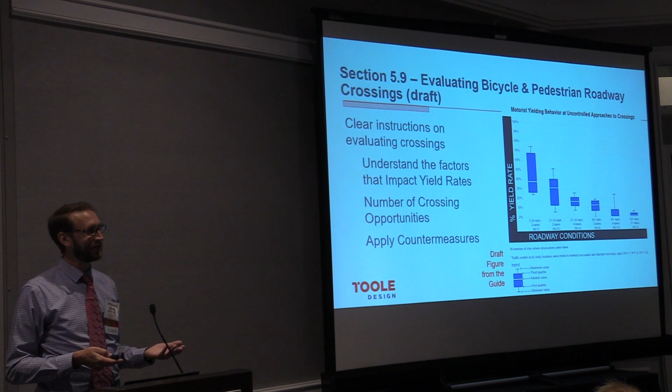Still taking photos, good. So the FHWA STEP guide, I hope you're all familiar with this one, really speaks to this idea that you have different street characteristics and therefore need to apply different countermeasures to make it safe and comfortable for a pedestrian to cross.

Before this guide comes out, you can continue to use that guidance for bicycle crossings, particularly at bicycle boulevard crossings. But we'll have this chart in the AASHTO Bike Guide to address what countermeasure is appropriate for a bike boulevard crossing, whether that's just signing and markings is okay because it's lower volume, lower speeds, only crossing a couple lanes. Whereas when you have higher volumes, more lanes, you need to be thinking about rapid flashing beacons or potentially signalization of some sort.

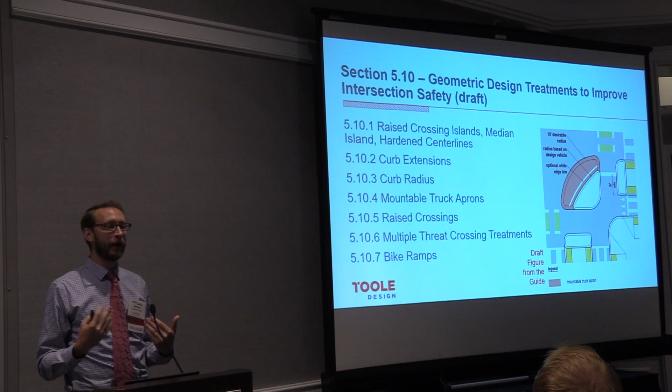And then we get into the actual intersection design treatments themselves, the different countermeasures and techniques that you can use to influence driver behavior and allow that crossing to be more comfortable for a bicyclist. So one of them is truck aprons. I feel like this is a very underutilized treatment that we can be using to control the effective corner radius for the vast majority of vehicles that are going through an intersection while still accommodating the larger vehicle.

We also talk about bike ramps. In the last version of the guide, I believe the only place that bike ramps were mentioned were at roundabouts. So we've been more deliberate about giving guidance about these different configurations. The preferable design is going to be one where a bicyclist is able to cross the joint of your ramp in a perpendicular manner. You still can use this option of making it kind of skewed, but recognizing that based on your bicycle design vehicle, that may present safety and operational challenges for them to navigate a ramp like this.

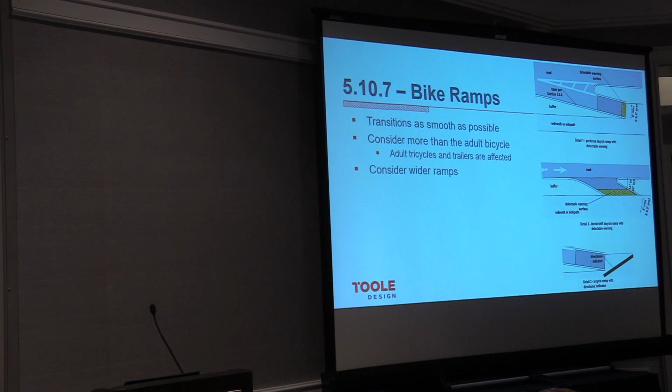Question on the last slide. When we developed the bike ramp guidance for roundabouts, we purposely didn't put one at the top, which is certainly better for bicyclists, but even with the detectable warnings, it was such a concern for people who are concerned about people who are blind or have low vision. Was that something that was rehashed in this discussion and kind of said, okay, it's okay to do this? The need to accommodate people with disabilities was baked into all of this guidance

and was the source of a lot of discussion throughout the development of these different treatments. And I think that's why we also have the idea of the directional indicator, because it helps to direct them away from the ramp rather than interacting with it at all. But again, it was a lot of discussion throughout all these different treatments, and things like separated bike lanes were just not in the vocabulary when ADA was developed, and so we're sort of continuing to feel this out. And I'm sure we will still continue to see changes as these things are implemented. But a lot of this was based on the research that was done as part of that FHWA shared street guide about user expectation in those types of environments.

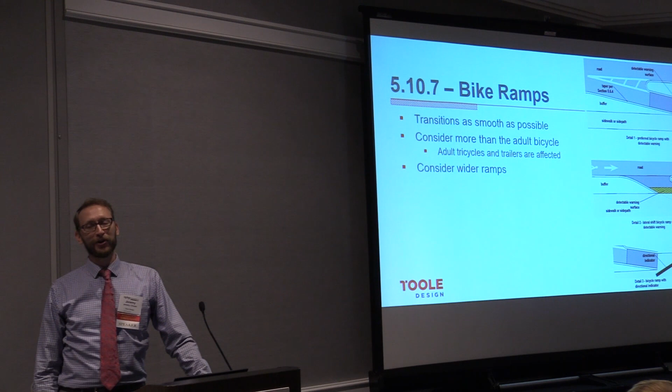Jeremy, I might want to talk to you later about this, but there's questions about placement of the DWS strip, and also do you provide guidance? I think there's still a conversation going on nationally about what direction the DWS needs to be, and you prescribe what the directional indicator is, and whether you can use directional DWS in other cases. Yeah, and that's why we were also very deliberate in the guide to just say that you must comply with accessibility guidelines, and we were not prescriptive about what that always means, because we recognize that this is going to continue to be an evolving area. So the best that we can do is say, make sure that you're complying with accessibility guidelines. But both of these options match what's currently in the MUTCD as well as the last version of the AASHTO.

And then lastly, in chapter 5, we talk about the different types of markings and signs that you should be considering. So the use of the turning vehicles yield to bikes and peds sign, different wrong way, and other signs that you can use.

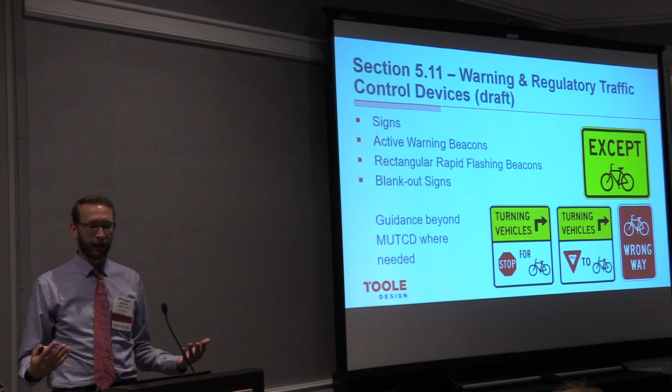And a lot of this, for both the signs and the markings, goes beyond what's currently in the MUTCD. So we identified in this document when things require a request to experiment and those that have interim approval, because we want it to be in everybody's toolkit. Whether or not they have those interim approvals for their state or jurisdiction yet, they should be aware of that so that they can then apply for those approvals. So some examples of that are the 2-stage turn box and the green markings.

So every time one of these treatments is identified in the guide, it says you're required to get a request to experiment, or you need to have the interim approval in order to use this treatment. But we wanted to make sure it was in this guide, not just reliant on the update for the MUTCD, because we don't know which one would be released first.

So chapter 6 is shared use paths, and it's an area that tried to address what I would argue are some historical deficiencies. We've designed to the minimum too much on shared use paths. I think there's good reasons for that. We're often in sensitive environments, we're trying to fit it in, but I think we've done a real disservice by calling a lot of these bike paths in communities where we're not providing safe alternative streets for people to bike on,

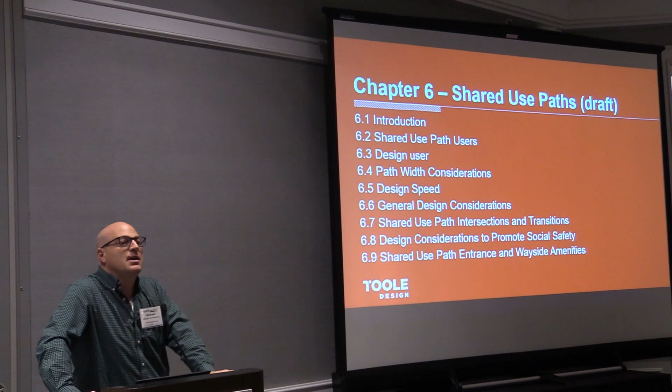and then all the cyclists are out there, and you get a wide mix of cyclists who are going fast and training or just wanting exercise mixed in with a lot of pedestrians, and it engenders a lot of conflict. And it's unfortunate. And so we're trying to head that off by being more direct about this, that the social aspect of cycling and walking can't be ignored. We're not going to social engineer people to ride single file and walk single file.

When you think about our transportation environment, it's designed for socialization. The car, the passenger seat, the group, the bus, the train. But for some reason, when it came to walking and cycling, because we're trying to squeeze it into a car-centric environment, we're going to pretend that people walk single file and bike single file, defying human nature, and it doesn't work. And it leads to all sorts of operational problems and safety problems. So we talk about that.

and in fact, injuries. These aren't going to be police-reported injuries generally. We're going to find them in the hospital. When we actually look at the hospital records, we're finding upwards of 50 to 60% of crashes that are unreported are collisions between people in environments such as this.

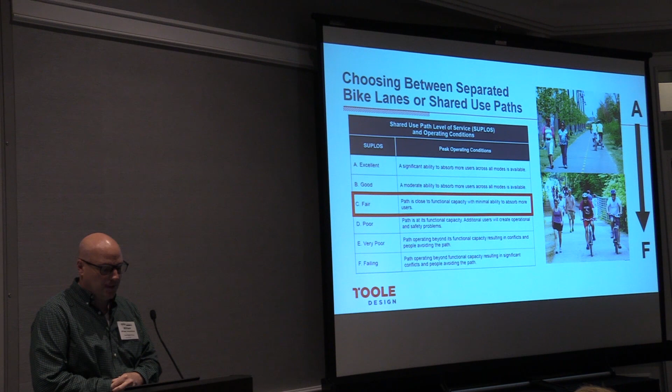I mean, we've been talking about level of service forever, and it's dictated built outcomes in our road system. Well, we have a level of service for shared use paths, let's start to use it. And we're recommending in the AASHTO guide a target of C. And that's when the path's close to functional capacity. Let's take advantage of this level of service system and identify conditions that we're shooting for. And we really want to try to allow for these things to be safe.

And we've created lookup tables. How much is your shared use path peak hour volume going to be? How wide is the trail? Well, here's the level of service.

We just ran all the numbers for you. We assumed a mode split because this accounts for people walking, running, on bikes. So you can change it, but we put in a default mode split and did some lookup tables to make it easy for you. We took those lookup tables and then turned them into recommended trail widths. Because again, this was in the 1974 guide.

I think this is sort of the tiers part of our discussion; in some ways we could have not done this and maybe just reprinted the 1974 guide and called it a day, because it was really quite good in many ways. So we looked back to that for inspiration, we tried to bring a lot of it in, and we have a table now. We should be thinking about these paths as having lanes. How many lanes do you want? Do you want to promote social cycling? Then you need at least 3 lanes, unless it's very low volume. If it's a busy trail, how about 4 lanes?

And we do this for motorists all the time, and we don't second guess it. We talk about trails, it's suddenly controversial, that we're going to spend all this money on a wider trail. We don't want it to look like a highway. We don't want to have striping on it. I mean, it's crazy. We want it to be safe and functional. So what are the design criteria we have? What are the expected volumes we're going to have? And what are kind of minimum widths?

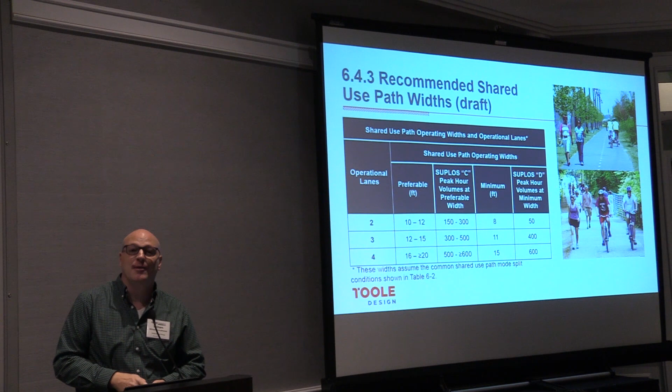And we have thousands of miles of 8 and 10-foot trails in this country that have a lot of safety problems. This one's in my own neighborhood, Maryland, and there are huge complaints all the time about safety issues. There's talk of banning cyclists at times, or we need speed limits. So we want to get away from that. So we really head this on directly. This is fine for low volume, it can be narrower, but once you get into high volume situations, you're going to have conflict, and there's a point where it'd actually be better for everybody to separate.

We're actually working with the Northern Virginia Regional Park Authority to separate the W&OD Trail, one of the busiest trails in the United States. We're widening it out to 20 feet. They're slowly getting the funding together. They're slowly going to separate peds from cyclists so that it's actually a safe facility and actually an enjoyable facility. We've got to talk about the experience of it for people. Again, we put this in the Federal Highway multimodal guide. There's different ways of doing it.

One of the reasons Minneapolis sometimes beats out Portland in the trade of who's the best cycling city: the thing that Minneapolis has that Portland doesn't is they had a lot of abandoned railroads where they went in and they had grade separation, and they defaulted 20 years ago to a 20-foot standard trail width, which blows a lot of people's minds to hear that number. And they separated people walking from the bike lane just with a stripe, and it's uniform. They've got an amazing trail system, and now they're trying to add in an on-road system to complement that. But fundamentally, it started with a really, really great trail system.

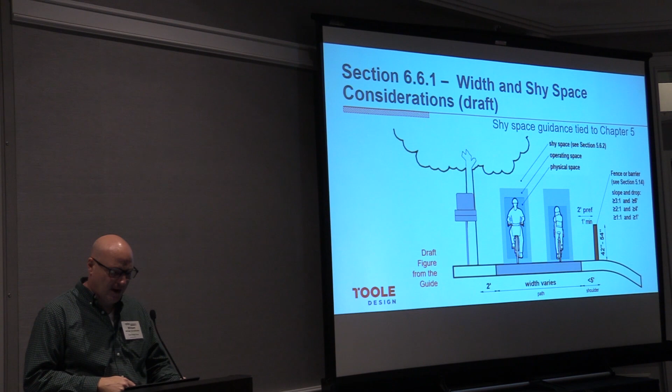So we're bringing all those concepts. There's all sorts of different ways to separate, giving the designer some ideas to think about it. Again, we talk about the idea of shy space. We bring all those basic concepts in, thinking about how people operate. And then, what happens when you're next to fences and barriers and walls and trees and all those things that are out there. And we talk about intersections and the sad reality.

I always kind of check myself, but it's amazing how often we have to make it more dangerous for cyclists because of bad motorist behavior. I've got to install bollards because drivers are driving down the trail. I've got to make it more dangerous for cyclists because the motorists are being reckless. And that's a default. And there's too many trail systems that presumed it would be dangerous and put in bollards. And there have been multi-million-dollar lawsuits and judgments filed against public transportation agencies for having a one-size-fits-all bollard policy that has paralyzed people.

And so this is starting to change. And we're giving other ideas of how to restrict the bad actors with other design strategies. And it can be as simple as thinking, how about we try a flexible post? And why is it always going to be a steel thing that could really injure you? Why don't we start? And so we really discuss in an iterative way of let's do the least harm and

build up. There could be places where people are going nuts and you got to put the steel bollards in. But why do we have to start with the most extreme solution first and kind of have a more thoughtful approach to this? That's a quick overview of trails.

All right, next up is separated bike lanes, and it's important to note that we've actually lumped separated bike lanes and side paths together in this chapter because they have fundamental similarities when we get to intersections. And so that's really why these were combined. When we're talking about the widths of them, you still turn to Chapter 6 for shared use path guidance. But when it comes to the intersections, we'll lump them together like this.

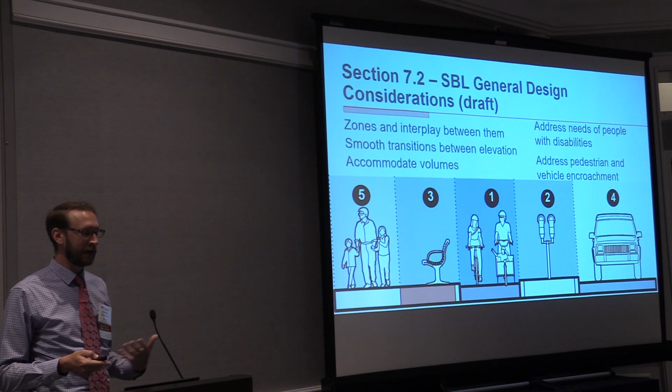So a lot of this content is already in the MassDOT guide. We used that as the sort of starting off point and made some modifications where appropriate. Really talks about the different zones as part of a separated bike lane. You have the bike lane itself, the buffers on either sides, and then everything else in your street. Again, recognizing that we would need to accommodate people of all ages and abilities, as well as people with disabilities, so that's very deliberate anytime we're talking about crossings of the separated bike lane.

Different types of curbs, and these curbs actually come straight from the AASHTO Green Book, so I know some jurisdictions don't do sloping curb, but it's in the Green Book, and if they're saying, well, we follow the Green Book, it's already in there. But being very deliberate with the choice of curb, because when you have a vertical curb or a curb with gutter pan, the bicyclist will naturally shy away from those locations.

Whereas if you're deliberate and you select a sloping curb or a mountable curb, it's then comfortable for a bicyclist to bike basically right up against that. They're not afraid of pedal strikes. So it really opens up the width of your facility to accommodate somebody that's going to be comfortable biking along there.

And so in terms of the width, we've then been deliberate based on the type of curb or other vertical element that might be adjacent to it, that we've then specified the width of the bikeway based on those constraints. So when you're between two vertical curbs, that's the most challenging location because you're going to shy away from the curb on both sides. So that's 6.5 feet, whereas when you're at a sidewalk level or not adjacent to a curb, a separated bike lane that's 5.5 feet wide may be okay.

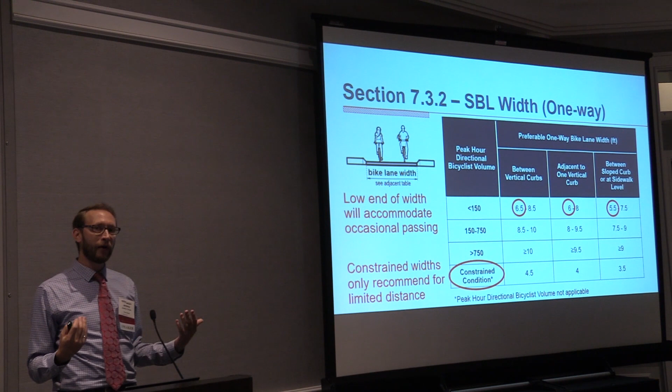But you also have to recognize with these widths that some of these lower end values and certainly the constrained condition values are not going to accommodate side-by-side riding. They'll accommodate occasional passing in some instances, but things like the constrained width should really only be used for very short distances. So for example, behind a floating bus stop or behind accessible parking.

But we made sure to give a range here based on not only those physical constraints, but also the anticipated volume of bicyclists. And it's important to think that it's the anticipated volume, not what's currently on that street. So building that into the planning process as well as the design process.

Does it go into, you mentioned the grates, moving grates and retrofitting existing, and also utilities and other things that might be there already? I mean, it does talk about grates. It's not prescriptive about how you're supposed to do it, but it does point to the idea that the bicyclist is not going to ride next to a gutter pan. If you're providing inlet grates, they have to be bicycle safe, but recognizing that some bicyclists are not going to ride over that. But again, that's sort of a constraint issue as well.

I often say that it really comes down to the inches matter for all of these designs. So when you have the gutter pan, you're kind of throwing that space away, and it means you need a wider bikeway to accommodate that side-by-side riding. The other thing we do mention in the guide is that if you're going to provide a gutter pan, consider providing it for the whole width of the bike lane.

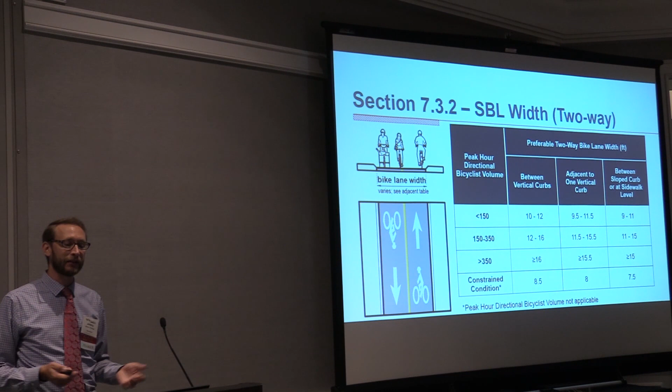It also talks about the different elevations that you can be considering. Sidewalk elevation has its pros, it has its cons. It really elevates you up away from the roadway, but can present challenges with sidewalk interaction and accessibility, particularly if you don't have a detectable sidewalk buffer here. If this is all concrete, and then you have your bike lane, we've given no indication to the blind pedestrian that they have wandered into the bike lane. So the guide does address that as well.

The street level, which is what we find most of our retrofits are done as, we're not changing the curb line, so we're down at street level. And then the intermediate level option, which is usually my preferred go-to as a personal choice.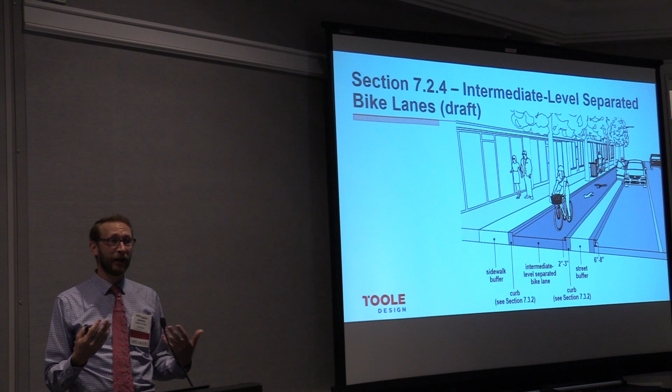And this is often just because from a grading perspective at intersections, it can make it a little easier when I'm dealing with bus platforms. Grading that out and making it ADA accessible tends to be a little bit easier with this option. But you also don't need to have a continuous elevation for the length of your corridor. So you can have street level separated bike lanes, and then as you approach intersections, you can change that, or vice versa. It can be sidewalk elevation and then ramp down to street level as you approach the intersection.

Right, so the 2 or 3 inch reveal curb can be vertical. You're not going to be worried about pedal strikes with that, but it does then sometimes present challenges of the bicyclist not being able to perceive that it's a vertical curb. And so you may still want to do a small bevel on it so that they can exit out to access bike parking and things like that.

And that's really the best use of the mountable curb, when you have maybe a bike share station back here and you want to give easy access from the separated bike lane to that location. The use of the mountable curb is naturally going to accommodate that. Just a transition to a mountable like that. Yeah, and again, that can change along the length of your corridor too, based on the context. So you can be deliberate in selecting that curb type.

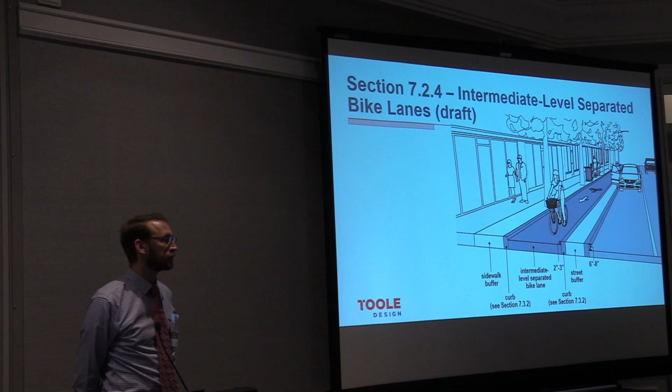Like, we talk about dooring on biking. We've had dooring on driving, so in your rendering there, we're focused on the bikeway, but the shopper in the driver's seat has to get out of the car, opening their door in that particular drawing. So like the parking lane width and the trade-offs, the parking lane width we might want on a 30-mile-an-hour street so that the shopper, when they open their car, doesn't feel like they're going to get run over or their car's going to get hit. So big picture, obviously this is the whole profession, the trade-offs and interactions, but how do you consider the other users, including the motor vehicles, in that design?

Yes. So the width of that buffer is going to be contingent on how much space you generally have. We have 2 foot. Not the buffer, the other side. I'm talking the other side, between the car lane and the parking lane. You have a parking lane in your cross section. This right here. Yeah, you're thinking about the buffer for the bike and the car, but the driver getting out and interacting with the moving lane, how much you get for that will decide how much you have for your buffer. Does the driver getting out in the moving lane get enough buffer, or the one by the bike lane? You're often deciding between those two things.

Right, so that choice of whether to do a 7-foot wide, very narrow parking lane versus an 8-foot, we don't specifically address that. We do address the interaction here between the door and the bike lane, but I think that's going to be a decision that each agency is going to individually address based on their policy.

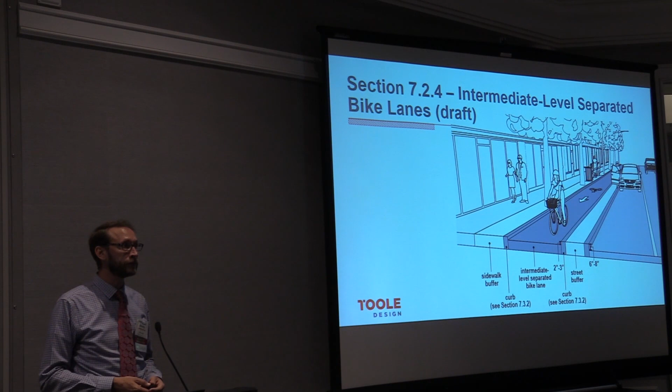Hey, Jeremy, before you go, can you talk a little bit more about your street buffer, not Brian's point, but the elevation? Like, so you're dropping down 3 inches for the bike lane, and then you're coming back up, and then you're going back down to the street. Like, have you done this a lot? Is this kind of like...

I've never done it. I think some of the designs in Boston have that. And when we're talking about precast curb, that has that configuration where you're having a raised median, you would have to step down and across it if you had on-street parking. What it does mean is you need to be thinking about accessible parking in locations that need to have accessible parking. And we'll have that in a few slides, but... And drainage. And drainage, right. You can't just run it off.

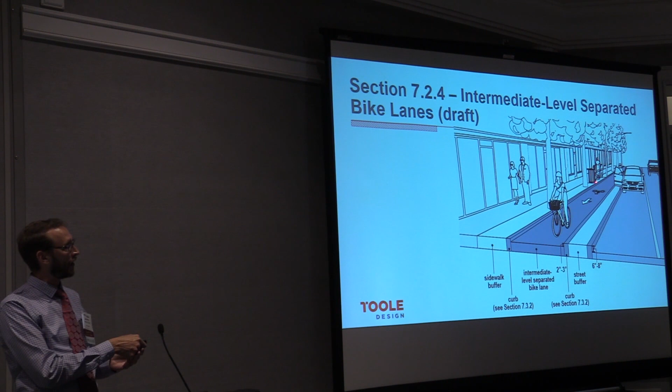Well, and the thing about these designs, at intermediate level, you can choose which direction you want the water to go. So if you want to have your trunk line here, because you're doing a full street reconstruction, you can then slope that towards that inlet structure. Whereas if your existing trunk line is already here, you can choose to slope it through there, and then you need an additional structure.

Do the cycle tracks in Northern Europe have this design? Do they pop back up like this? So most of the ones in, say, the Netherlands will often have intermediate level and they'll have a small inlet grate, really small, to capture storm water within that. Do they come back up to sidewalk level? In the street buffer? Yeah, side street crossing. And they don't have to either. You can keep it at sidewalk level or intermediate and then have a raised crossing when we get to the intersection, depending on the characteristic of your intersection, how much volume is going across that location. And that's more standard in the Netherlands.

Thinking about the other users, this looks very similar to Maine Avenue in DC, and noticing where you have sort of that separation. It's this brand new, sparkling bikeway, different colors, concrete. People are still using the sidewalk as they used it before, and this is kind of part of their idea of the sidewalk. So look at the groups at bus stops or at crosswalks in the bikeway. And because there's those physical elements in the middle separating you from the walkway, you're kind of pegged in between that and the delivery vehicles. So I'm wondering if there's any recommendations on whether or not to include those options, like if you have a choice of planting trees in the middle there, or along the street buffer or the sidewalk buffer, negotiating between that and what you're going to actually find with user behavior. And education can go so far, but intuition.

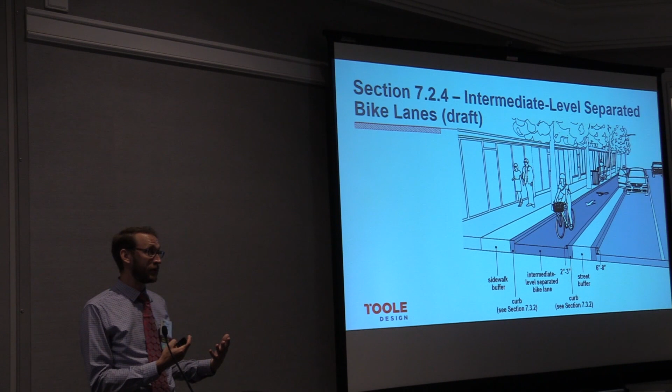And I think that's another one of those context-sensitive decisions, that when you're in the urban core, it may be appropriate to be doing your street trees here, to define the sidewalk environment with those different types of treatments. In other locations, it might be important to put the tree buffer here because you're trying to tie it together with green street infrastructure. So the context really matters. And the guide really does hit on that over and over again, that there is no one-size-fits-all answer, that every block really needs to be looked at based on the operations of the adjacent businesses or properties, and making sure all of that is accommodated with the design, or you're setting yourself up for failure.

So the guide also talks about the different types of street buffer treatments that you can use, and the pros and cons of each of them, what the benefits are and what you need to be thinking about. So raised medians really give you a good sense of separation. It's a physical element. It gives you these opportunities to incorporate green street infrastructure, but they also tend to be a little bit more expensive. Same thing goes for the precast option.

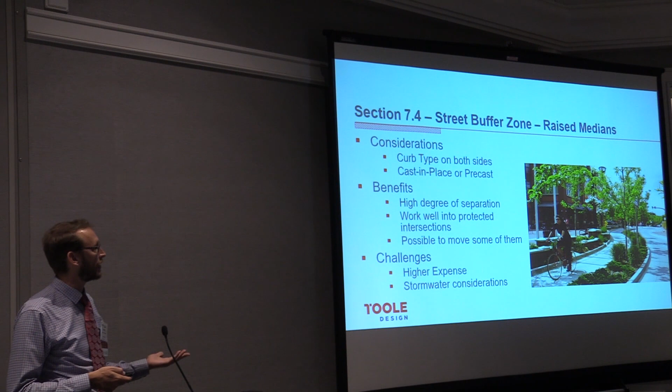So this is sort of a larger capital improvement project. This represents a precast curb in Austin. One thing that we found in some areas with the precast curb is we're getting really high prices from contractors because it's very costly for them to cast it, move it around at the plant, bring it to the site, deliver it, move it around on site. And so being very deliberate with the sizes of these when you're speccing them out can also really matter.

We did a similar treatment in Houston, and the lengths of them were much smaller. So more segments of it, but it was easier for the contractor to handle, and so we got much better prices for that. So is that up 3 inches, the bike lane? Or is that? No, that's at street level. This was a retrofit design.

Okay, so this has the little curb, like the precast curb. You don't have to worry about the drainage because of the units, and so you can drain. Right. And then that's a 7-inch curb, 6-7 inch curb. Yeah, so you always have different options about how you're going to handle the drain. Did you cast that flat curb?

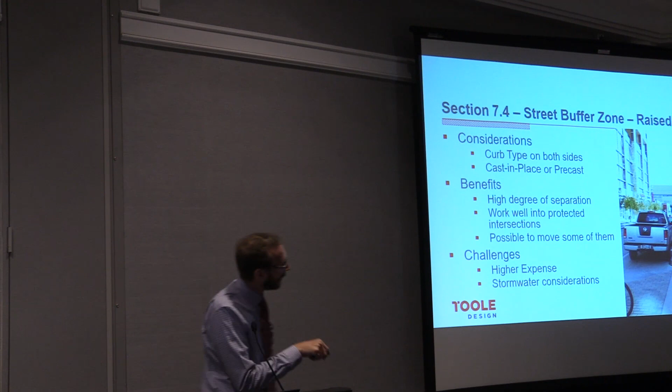That's a precast curb. No, no, the flat one. In front. Oh, that. What is that? I think that might be mountable. That actually might all be flush. That's a full height curb. It's not obvious in the photo. Yeah, you're approaching the intersection where they did an island. But there's also going to be situations where you're going to want that to be flush, with accessible loading, those sorts of things.

And does this guidance also lend itself, I guess, there's a lot of emerging design, like curb rail and bike rail, that are more modular, that have sometimes more temporary uses, that actually are bolted and can be to some degree semi-permanent as an alternative to these types of precast. I know that the cost and installation of those are significantly lower. Is that something that fits in this?

So what it does talk about is that when you're dealing with retrofits, things like flex posts or bike rail are probably going to be your options. It also talks about things like footrests, where you don't need to worry about the shy distance because the expectation is you're supposed to be using that to set your foot out on. So it does cover those things as well.

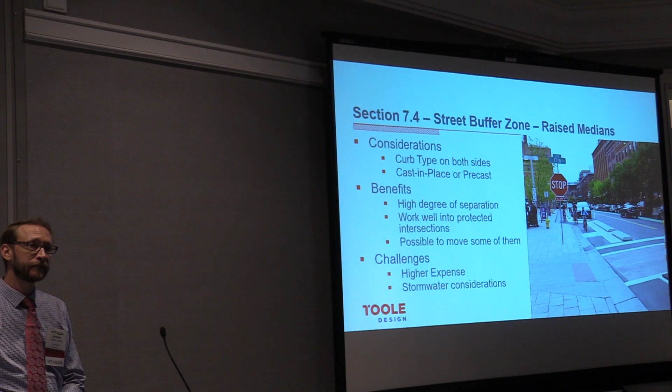I have a question, I guess a comment, about the design of some of these and the factor of snow storage. I'm working in Boulder, Colorado, and we get a ton of snow, and there are some designs that are more amenable to snow storage versus others, and I'm wondering if you included snow storage as a potential challenge in the designs.

Yeah, the maintenance piece is now its own chapter, and it talks both about snow removal and storage as well as street sweeping, and this idea that if you're thinking about implementing a one-way separated bike lane, particularly a 6.5 foot wide one, that may require investment in other equipment. In some cases, for snow removal, that may require you to pick the snow up and put it in a dump truck, which some jurisdictions are already doing. And in others, it might be the deciding factor about how wide you're going to make one of these buffers, whether that's the street or the sidewalk buffer, to deal with that issue.

And we've seen it implemented in Boston, and they got 8 feet of snow 3 years ago, and they still plowed the separated bike lane. You had an 8-foot wall of snow next to it, which didn't comply with the sight distance requirements. But we've seen that it will work. You just need the equipment to be able to get in there and clear it out.

Flexible delineators, sort of the go-to for any retrofit installation. The challenge with them is that it kind of looks like a traffic work zone, and so it might not be appropriate in some locations. In some instances, you might want to consider something that's a little larger, that looks more substantive, like the ones Los Angeles and others have been doing, the K71 bollards.

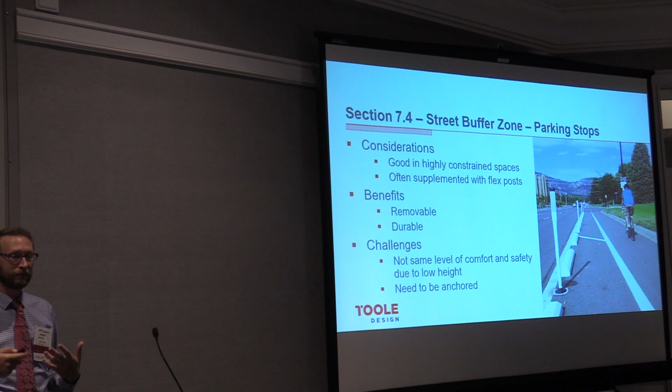They certainly look more substantial, and we find that drivers kind of shy away from them a little bit more, anecdotally. No studies on that I've seen. And then you can sort of mix and match as well. You can do flex posts and parking stops and other treatments based on the characteristics of your location.

Another example of parking stops and flex posts. Planters are one that we hear lots of concerns from engineers about crashworthiness and what about clear zone, and these are fixed objects. And when you look at, and we summarize this in the FHWA Achieving Multimodal Networks Guide, when you're talking about low-speed environments, this idea of clear zone is really not relevant. It's not relevant to an urban environment or streets that are slower speed.

So in AASHTO, we say above 30 miles an hour, or between 30 and 35, you need to be really deliberate in selecting a planter type that would break apart if it were hit at higher speed. On those lower speed roads though, like this example from Portland, you can have a concrete planter, and that's going to be okay from a low speed environment design consideration. And these are the types of things that some businesses are really going to like to see. It's more decorative, it doesn't look like a work zone, but these also require maintenance.

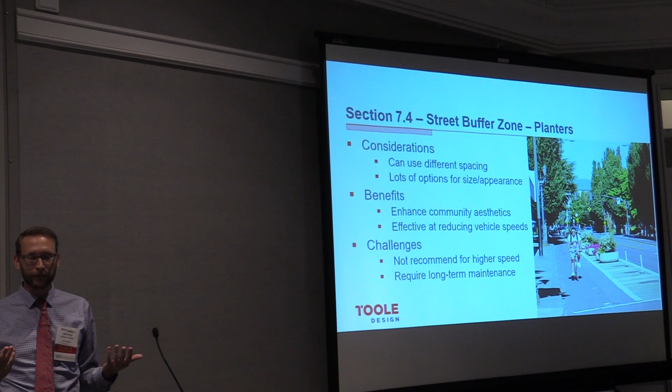So looking for opportunities to partner between different agencies is a good way to help to ensure that these are maintained. I encountered one in Connellsville, Pennsylvania along the trail that runs between DC and the Great Allegheny Passage. And they had a sign there that said, "This buffer maintained by the local herb club." So they found partnerships to link agencies in a community, and I think that's what Keith was talking about this morning, is how do you find ways to engage with the public? This might be one of those opportunities to really link different agencies.

On-street parking can serve as that buffer, with or without flex posts. Again, this is going to be contingent on how frequently that parking is occupied. So if it's not occupied all the time, you probably need to supplement it with flex posts. If it's always occupied, the parking itself may be acceptable. But again, you have to think about the driver experience as well. Are they going to encroach in the bike lane if you don't put the flex posts? And that's going to vary based on their familiarity with the facility type. Are they the people that are parking there every day, or is this a business district? Somebody that's new to the area doesn't really know where to park.

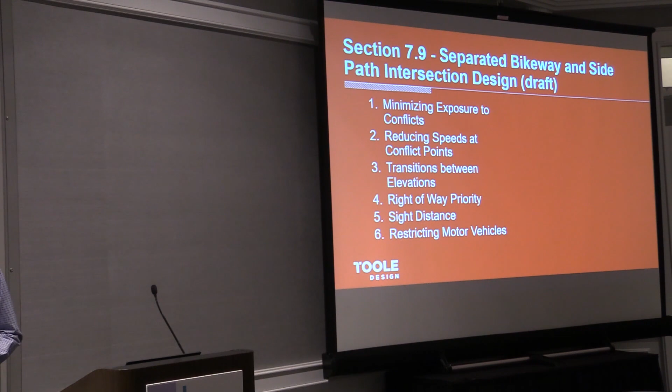So we got 10 minutes left. We can let you all go now if you want, but we could do some Q&A, and we could also take a poll of questions you have.

So we have a whole discussion on intersections that's covered in detail. We have a bike lane chapter, a rural road chapter, signals. We even have a high-speed intersection chapter, which is really interchanges, like highway interchanges, freeway ramps, things of that nature. So we tried to give the broadest range of conditions that are out there. And then, as Jeremy's mentioned, we have a whole chapter that's on maintenance policies and practices.

Because we acknowledge in the bikeway selection chapter that, frankly, there's going to be some agencies that make decisions on bikeway selection, not on what's the best thing for cyclists, but on what's the easiest thing for them to maintain. And so we talk about that as a legitimate choice, but we also talk about, well, understand the implications of that choice and who your design user is. And you may have just changed who your design user is so that it's easier for you to maintain it.

And this is very typical of a DOT who owns the road, but they say it's a local responsibility to maintain the sidewalks. We'll build you bike lanes and shoulders because we can maintain it, but we can't maintain a separated bike lane because now there's a barrier. And I'm seeing that as a primary decision point in a lot of state DOTs of whether they're willing to build separated bike lanes. Mentally, they're on board, they understand, but they just don't feel they have a process in place for maintenance. And so they're really looking for partnerships with local agencies to get them over the hump for that.

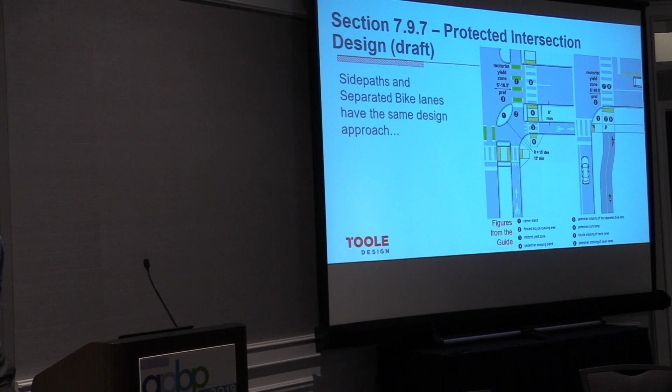And that if it's shared mixed use, then it's really just the standard white crossing. They can be decorative, whatever the local agency wants, but we're going to show these standard ones. And then whenever there's separation of bicyclists, to mark it green so it's clear what it is. And there's a lot of discussion in the guide under the concept of legibility to mark the crossing for bikes, whether it's a separated bike lane or a bike lane,

and we need to start thinking about making sure it's visible. And in any area of transition, we have a lot of discussion about transition because we're going to have a lot of transitions from shared use to protected bike lane to bike lane and buffered bike lane. Any transition area is a really important focus area. And then we really want to use green to make it intuitive and obvious. And in Portland, last night we rode through a lot of those. The use of green was really powerful in making it obvious where I'm supposed to go and how I'm supposed to navigate this transition, and it can be a real helpful tool.

We'll take one more. One thing I'm wondering about is, following up on the other question earlier about suburban locations. So, like in small towns and suburban areas, there's many reasons why the separated bike lane is less likely to work or less likely to be done because you have less cyclists. More driveways make it more challenging. You have to take more parking off the street, for example, if there's parking. And the maintenance issue, right? Small towns just don't have the maintenance budgets a lot of times to maintain a separate bike lane.